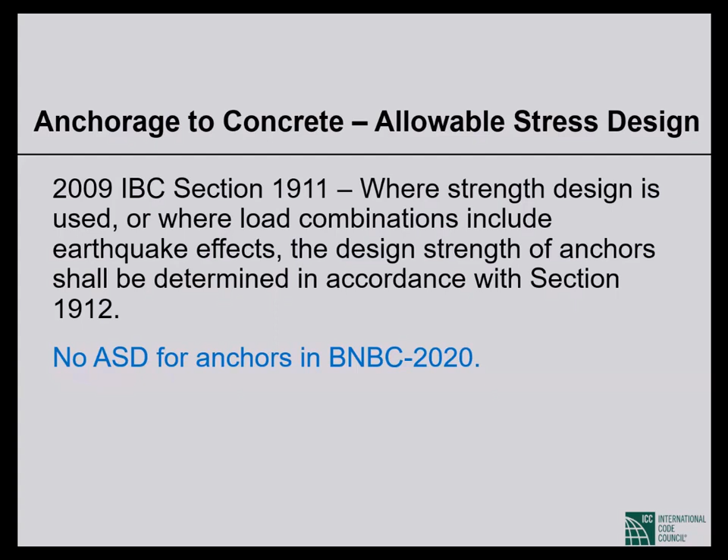IBC was saying when you were doing strength design for your structure that included the anchors, or when the anchors were subjected to earthquake forces, you had to do strength design. Now, I wrote in blue letters, and whenever you see blue on the slides, it relates to BNBC 2020, that there is no allowable stress design of anchors in BNBC 2020. All you have is strength design of anchors in Appendix K, as in king.

The other thing that I thought I should mention: 2009 IBC said the provisions of this section 1912 shall govern the strength design of anchors installed in concrete for purposes of transmitting structural loads from one connected element to the other. Headed bolts, headed studs, and hooked bolts, which can be J or L bolts, cast in concrete, and expansion anchors and undercut anchors installed in hardened concrete shall be designed in accordance with Appendix D of ACI 318 as modified by Section 1908.1.9, etc.

So the IBC was sending the user to Appendix D of ACI 318, where the anchor design provisions were. And the other thing is that IBC itself made a couple of modifications to Appendix D. Now, you don't have any of that. No comparable provision in BNBC 2020.

There is nothing in the code itself that directs you to Appendix K for anchor design, except for something that Dr. Akib found for me, section 6.8.8.3. So Appendix K itself is in Part 2, Chapter 6 of BNBC. This section is also part of Part 2, Chapter 6, and it says in precast construction, anchor bolts or suitable mechanical connectors shall be permitted for satisfying such and such section. Anchor bolts shall be designed in accordance with Appendix K. But this section is only for precast concrete.

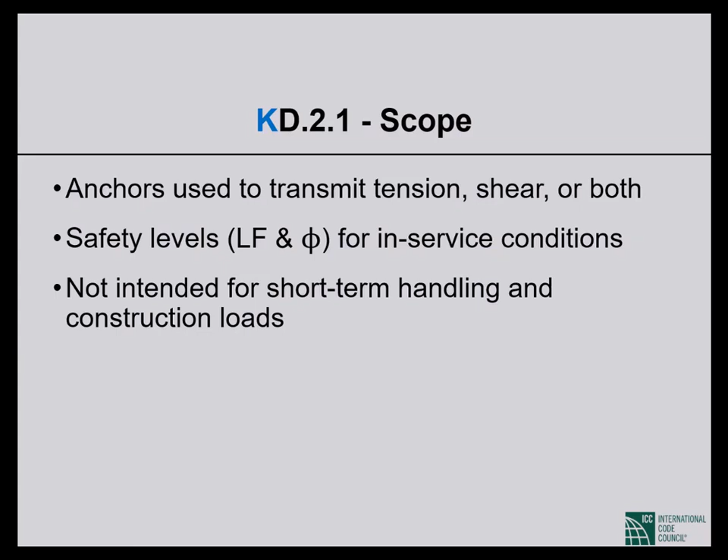The load factors and strength reduction factors used in Appendix K consider in-service conditions of the structure. The appendix is not intended for use for short-term loading and for construction loads. This is very important. Construction loads are not included in the scope of Appendix K, neither are short-term handling loads. If you have to install anchors to transmit construction loads, you have to go beyond Appendix K to do that.

The appendix has provisions for cast-in-place anchors and also post-installed mechanical anchors.

Excluded from the scope of the appendix are specialty inserts of various kinds, through bolts that go through the body of concrete, and multiple anchors connected to a single plate at the embedded end of the anchors. This is a pretty popular item when groups of anchors are not working out; people try this to enhance the capacity of the group. However, the problem is the concrete at the interface of the plate, the concrete just above the plate, is of poorer quality. We know that, but we do not have a handle on how much poorer the quality of that concrete is.

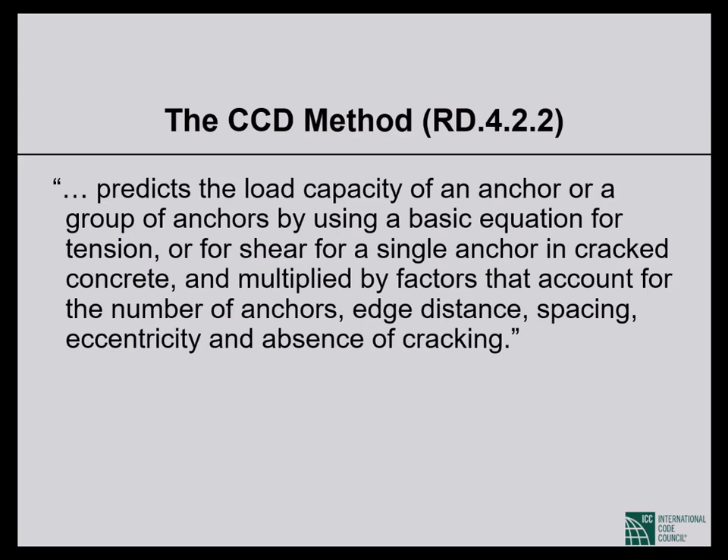The concrete capacity design method predicts the load capacity of an anchor or a group of anchors by using a basic equation for tension and a basic equation for shear. Each equation is for a single anchor in cracked concrete, which is multiplied by factors that account for the number of anchors, edge distance, spacing, eccentricity, and absence of cracking.

Before the concrete capacity design method, we used to use intersecting cones. The idea was when an anchor subject to tension pulls out of the concrete, it typically takes a chunk of concrete with it. We postulated back then that the chunk of concrete that comes out with the anchor is in the shape of a cone and that the failure angle is 45 degrees. If you had a group of anchors, you had to deal with intersecting cones, which was a pain. Anybody who has done anchor design by the old method would readily agree with me that it was pretty painful.

The concrete capacity design method has replaced the 45-degree failure cone with a truncated pyramid. Now the postulation is that when a group of anchors in tension comes out of the concrete, the chunk of concrete it takes with it is in the shape of a truncated pyramid, and the failure angle is 35 degrees rather than 45 degrees. These are the basic differences between the concrete capacity design method and the 45-degree failure cone method we used to use: a truncated pyramid with a 35-degree failure angle.

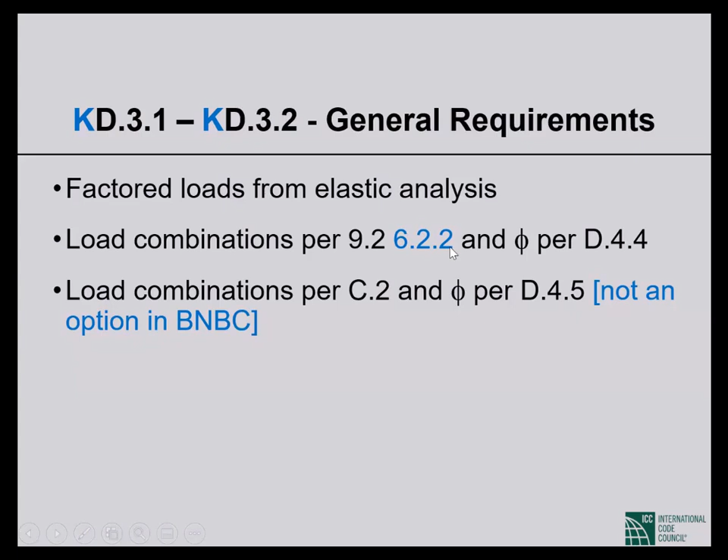Load combinations: in ACI 318 Appendix D, there was a choice of using load combinations in Appendix C rather than load combinations in Chapter 9. Those are traditional ACI load combinations that we need not worry about. There was a set of phi factors to go with those other load combinations. None of that is in BNBC 2020. So your only choice is load combinations from section 6.2.2 and the phi factors to go with those load combinations, given in section D.4.4.

Now, the K.3.3 section I mentioned, seismic applications: if you have an anchor that is part of a structure assigned to seismic design category C, D, E, or F, the requirements that apply to that anchor include that anchors in plastic hinge zones of structural members are outside of the scope of Appendix K.

So for a seismic application, if you want to put an anchor bolt at the end of a beam, near its column support, that anchor is excluded because there will be plastic hinging at that beam end. Cracking itself is a big enough problem. When it is plastic hinging, meaning extensive cracking and possible yielding of reinforcement, we know very little as to how our anchor may be affected. So ACI 318 has said this is outside the scope of Appendix D. That does not mean you cannot do it, but if you want to put an anchor in the plastic hinge region of a member, you are on your own — Appendix D or Appendix K does not help you. It is outside of scope.

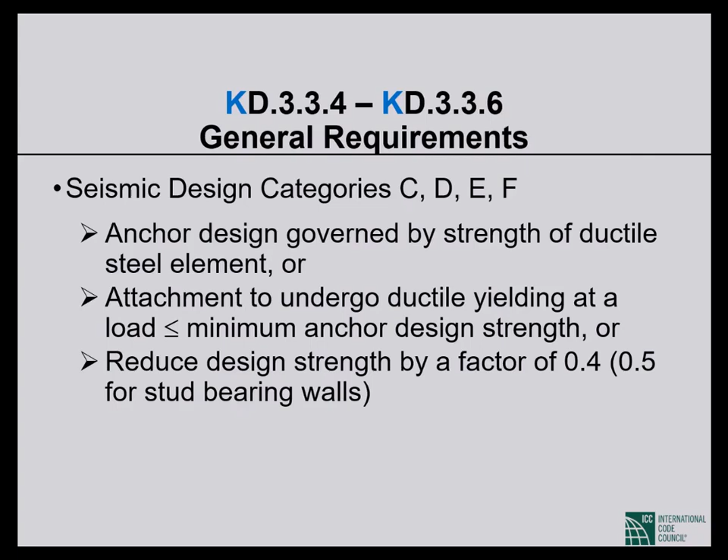Now we talked about ductile anchor failure. What is a ductile steel element? What is a brittle steel element? These are defined in BNBC, chapter 6.

The definition is that when you pull on an anchor, just like you pull on a reinforcing bar in a tensile test, if the elongation, typically measured over a 2-inch gauge length, is less than 14%, or the reduction in area—as you pull on the anchor, there is eventually necking, the area reduces before there is a rupture—if the reduction in area is less than 30%, or both, then you have a brittle steel element. If the elongation is larger than or equal to 14% and the reduction in area is larger than or equal to 30%, you have a ductile steel element.

A steel element meeting the requirements of ASTM A307, which are very common, shall be considered ductile. So the anchors we typically use are ductile, but there are brittle anchors as well.

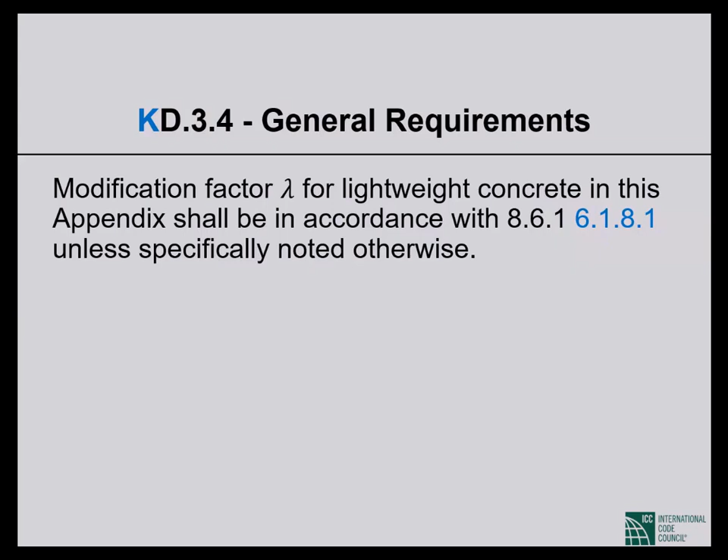The modification factor lambda for lightweight concrete comes from the main body of chapter 6, and the section number is given. Now, as in the design of any structural element, the design axial strength of the anchor has to be larger than or equal to the required axial strength, and the design shear strength of the anchor has to be larger than or equal to the required shear strength.

Now, for an anchor subject to tension, we consider multiple failure modes, and the lowest of the strengths corresponding to the multiple failure modes is the nominal axial strength N sub n, which has to be reduced by a proper factor. Similarly, for an anchor subject to shear, we also consider multiple failure modes. Whichever failure mode gives us the lowest design strength is the one that governs, and that lowest design strength still has to be larger than or equal to the required strength. And if an anchor is subject simultaneously to tension and shear, then the interaction between shear and tension has to be considered.

From this point on, I will introduce a numerical example and introduce the code provisions as we work out the example. I think it makes a lot more sense that way—the requirements become much more understandable. Without numbers, these things are too abstract to be absorbed.

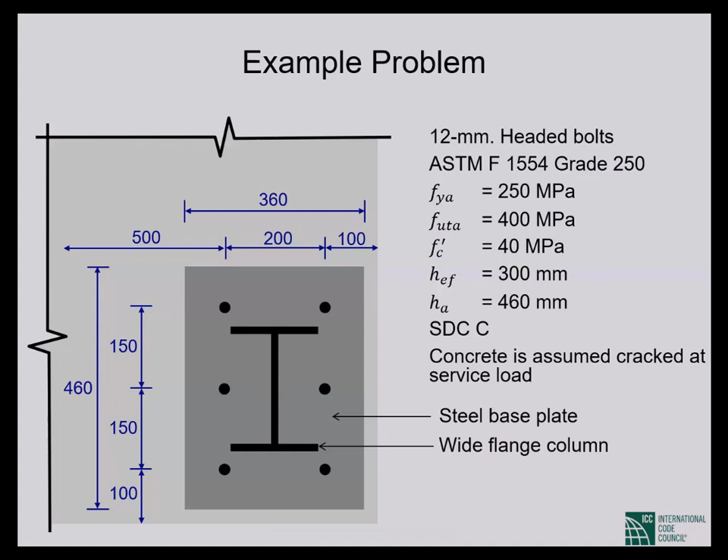Concrete is assumed cracked at service loads. So we have 6 anchors, the spacing one way is 200, the spacing the other way is 150 millimeters. Edge distance here is 100, edge distance here is 100. In the other two directions, we have plenty of concrete. This way, when we need an edge distance, we have taken it in the calculations as 500 millimeters—that's just something used for calculation purposes.

First, we consider this group of anchors subject to tension, which is applied at an eccentricity of 25 millimeters with respect to both the x-axis and the y-axis as seen in the picture, the centroidal axis. So 25 millimeter eccentricity both ways.

The failure modes that Appendix K considers in tension: the steel itself failing, concrete breakout failure, pull-out failure, and concrete side face blowout, which happens to headed anchors that are close to an edge with thin cover. So side face blowout happens when we have headed anchors that are reasonably deep and close to an edge, where the cover is relatively thin. It can happen in those situations.

So we have a group of anchors subject to tension that is eccentric with respect to both axes. First, we check for possible compression in any of the anchors in the group, because compression anchors have to be excluded. We include in our calculation only the tension anchors. So we are looking at the x eccentricity. We have an axial tension applied at an eccentricity of 25 millimeters. That tension is equivalent to a tension along the centroidal axis plus a moment, which equals the tension multiplied by the eccentricity, the tension times 25 millimeters. The concentric load will be divided equally between the 6 anchors, so each anchor gets 1/6 of the applied tension.

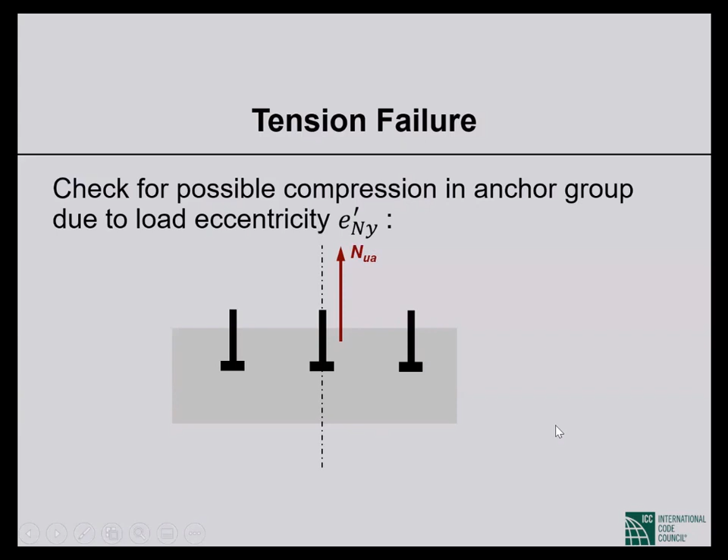The other eccentricity, the y eccentricity, let me put everything on the screen. That also causes the same moment, the axial load times the eccentricity. So that tension is equivalent to tension along the centroidal axis plus the moment. The tension along the centroidal axis is divided equally by the 6 anchors, and the moment causes additional tension on those 2 anchors and additional compression on those 2 anchors. The distance now is 300, so we divide the moment by 300, and now there are 2 anchors here, 2 anchors here, 2 anchors here, divided by 2. So this anchor gets a tension of 5/24 of the applied tension, and this anchor gets a tension of 1/8 of the applied tension. There is no compression here. This could go into compression, but that did not happen.

Either due to the x eccentricity or the y eccentricity, so the maximum tension on an anchor, considering both eccentricities, comes out to 1/4 of the applied tension, and the minimum tension comes out to 1/12 of the applied tension, with no compression. So we have checked and made sure that none of the anchors in the group is subject to net compression. We are okay, we don't have to exclude any of the anchors.

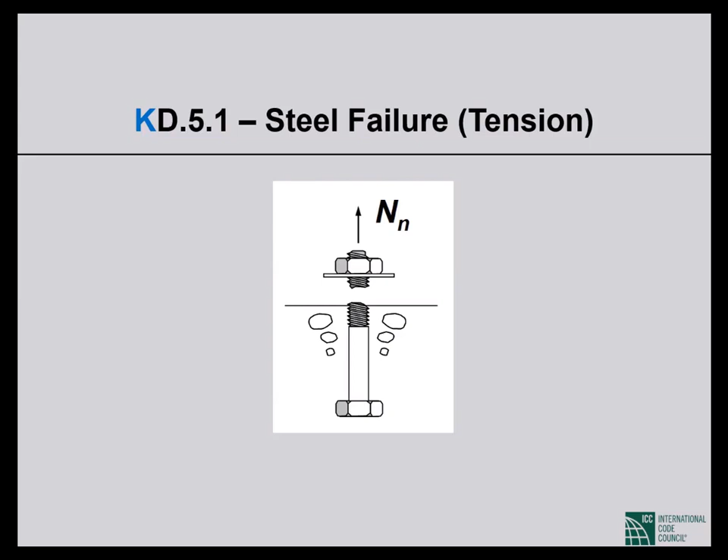So we have 4 failure modes. The first one is the anchor itself failing, just like a reinforcing bar fails under tension. If that is our failure mode, the corresponding nominal strength is the number of anchors in the group times the effective area of the anchor in tension. This is the area of the anchor excluding the threads, times the ultimate tensile strength. The ultimate tensile strength of the anchor, in our case I think it was 400 megapascal, has to be less than or equal to 1.9 times the yield strength of the anchor, which is 250 MPa, and it also has to be smaller than 860 MPa.

The effective area can be calculated using this formula, but there are design aids available, at least in the US, or I suppose your anchor manufacturer will give you that effective area number.

In our case, for the 12-millimeter diameter anchors, the effective area is 79.35 square millimeters. The ultimate tensile strength is 400 MPa, which is less than 1.9 times 250, that is 475, and it's also less than 860 MPa. So we satisfy the requirements that are imposed.

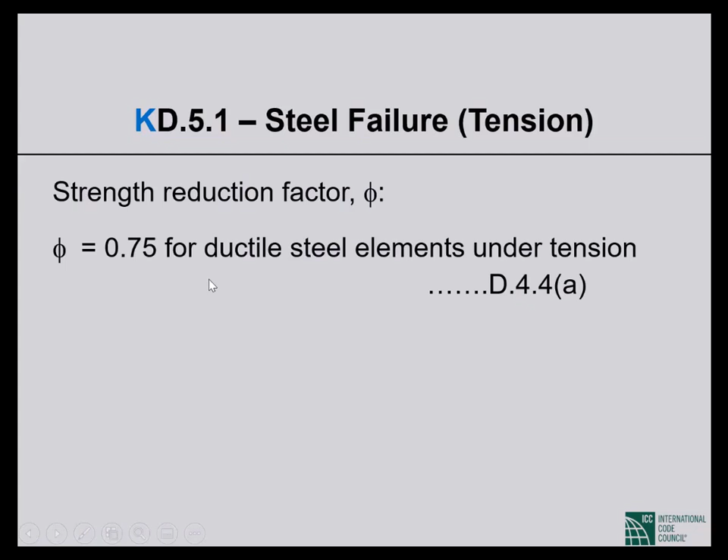The strength reduction factor, if you go to D.4.4, is 0.75 for ductile steel elements under tension. Since this is steel failure, we don't apply an additional 0.75 reduction. So the 31.74 kilonewtons of nominal tensile strength is reduced to 23.81 kilonewtons of design tension strength, phi times N sub SA. This is still for a single anchor.

Now, remember the maximum tension that any anchor in the group of 6 was subject to is 1/4 of the tension applied to the group. So if a single anchor can carry 23.81 kilonewtons, then the group can carry 23.81 multiplied by 4, or 95.24 kilonewtons.

Okay, so please follow this closely, this is important. A single anchor has a design strength of 23.81 kilonewtons. That is the maximum demand that can be put on a single anchor.

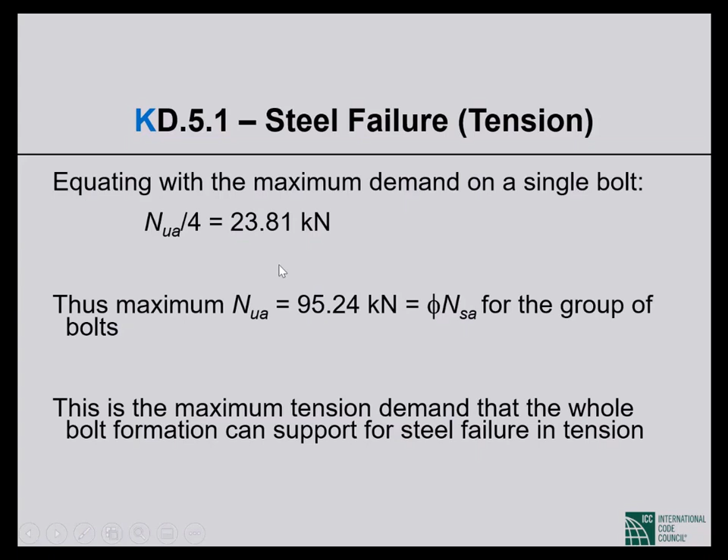Now, the anchor in the group that sees the highest tension experiences 1/4 of the tension applied to the group. So if a single anchor can be subject to 23.81 kilonewtons, the group can be subject to a design tension strength of 4 times 23.81, which is 95.24. This is the maximum tension demand that the whole bolt formation can support for steel failure in tension, 95.24 kilonewtons.

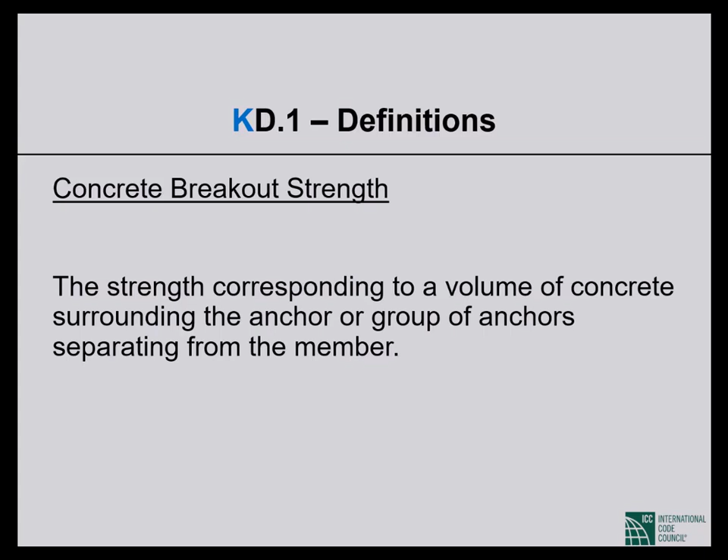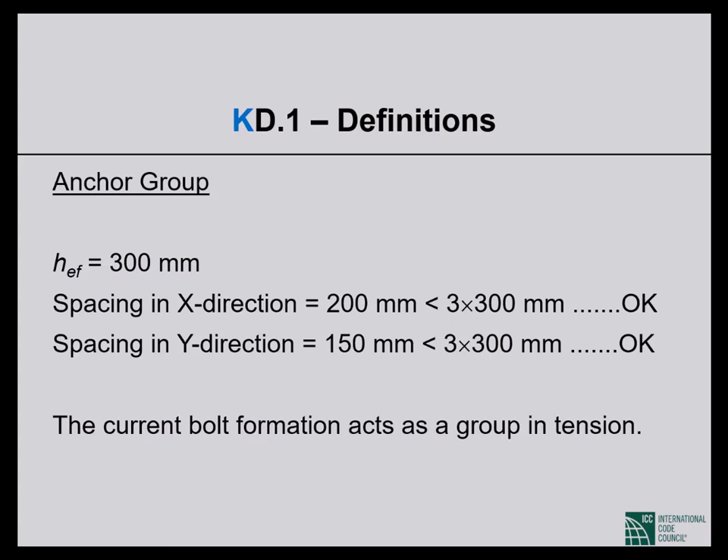So a group is defined by a spacing less than 3 times the embedment depth. Now we have 6 anchors, so we have 4 possibilities: 6 isolated anchors, 2 groups of 3, 3 groups of 2, or a group of 6, depending on the spacing in each direction. In the X direction, the spacing is 200 millimeters, less than 3 times the effective depth of 300 millimeters. In the Y direction, the spacing is 150 millimeters, less than 3 times the effective depth of 300 millimeters. So both ways the spacings are close, meaning we have a group of 6 anchors, not 6 isolated anchors, nor 3 groups of 2 or 2 groups of 3.

Now another complication: where 3 or more edge distances for an anchor subject to tension are less than 1.5 times the embedment depth, we have to use a reduced effective embedment depth in breakout strength computations. That reduced depth shall be equal to the larger of the maximum edge distance divided by 1.5, or the maximum spacing between anchors divided by 3.

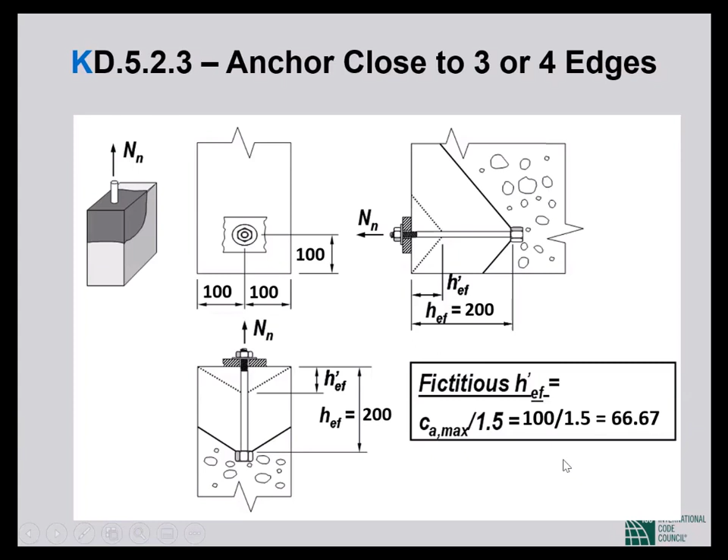Let's look at an example. We have an anchor with edge distances of 100 millimeters in three directions. The effective depth is 200 millimeters, and 1.5 times that is 300 millimeters. So each edge distance is short - the anchor is close to 3 edges. We must calculate using a reduced effective embedment depth, equal to the largest edge distance, 100 millimeters, divided by 1.5, which is 66 2/3 millimeters. So instead of the actual 200 millimeters, we use 66 2/3 millimeters for breakout strength calculations. This is a single anchor, so there is no question of spacing.

In the example problem, checking the number of edge distances less than 1.5 times the embedment depth: we have an embedment depth of 300 millimeters, so 1.5 times that is 450 millimeters. We have 2 edge distances of 100 millimeters, so our anchor group is close to 2 edges, not 3 or more. So we do not have to modify our embedment depth of 300 millimeters.

Now let's discuss A sub n0 and A sub n, starting with A sub n0. We have an anchor subject to tension, shown here in elevation and in plan. If the failure angle is 35 degrees, then this distance is 1.5 times embedment depth, the same into and out of the screen, and that distance is also 1.5 embedment depth. So that's the projected area of the failure surface of a single anchor in tension, considering edge distance.

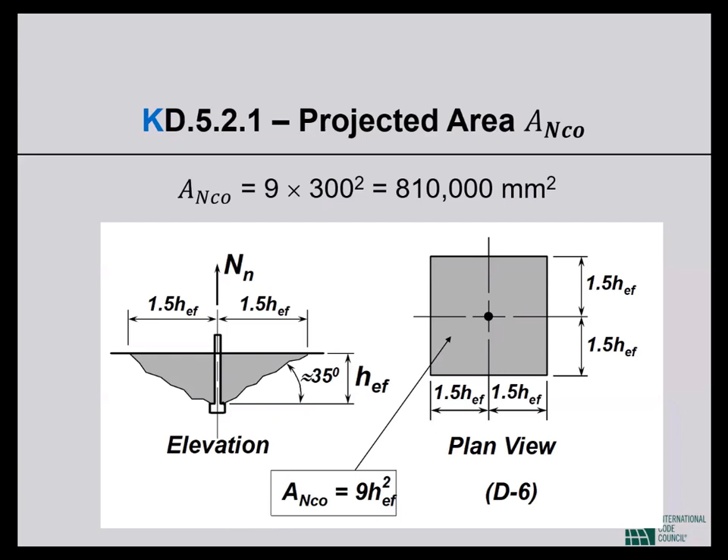A sub n is the projected area of the failure surface by a group of anchors in tension, considering spacing and edge distance. In this example, we have a group of 4 anchors. The edge distance this way is C sub 1, and the other way we have a large edge distance, but we cannot go any more than 1.5 times the effective depth.

A 35 degree failure cone means that this distance is 1.5 times embedment depth. If we have an edge distance shorter than 1.5 embedment depth, we have to go with the shorter edge distance. Spacing this way is S sub 1, and the other way the spacing is S sub 2. This edge distance is 1.5 embedment depth because we have plenty of concrete this way, but this edge distance is C sub 2. For an anchor or anchor group subject to tension, C sub 1 is the shorter edge distance, C sub 2 is the larger edge distance. This is how our notation is.

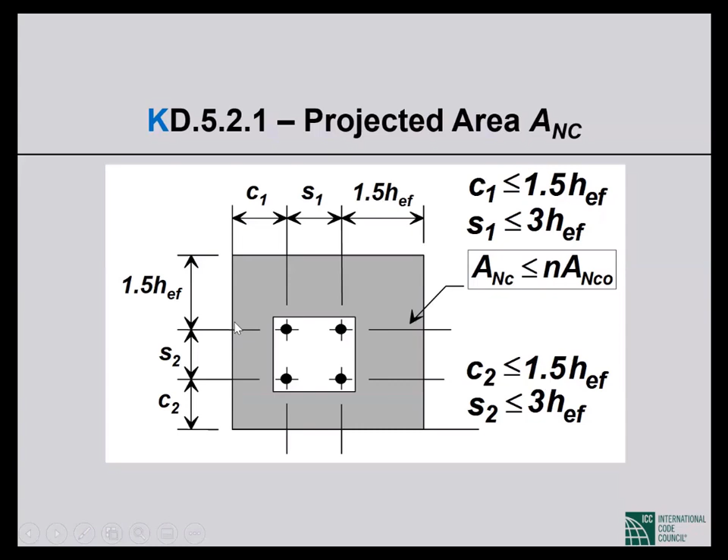In our case, we have a group of 6 anchors. These distances we know: 150, 150, edge distance 100. This way the edge distance would be 1.5 times our embedment depth, which is 450 millimeters, because we have plenty of concrete this way. Along the x direction, edge distance of 100, spacing of 200, we have plenty of concrete to the left, so we take 1.5 times the embedment depth, which is 450 millimeters. So our A sub n is 450 plus 200 plus 100, multiplied by 100 plus 2 times 150 plus 450.

That gives us 637,500 square millimeters. A sub n cannot be any larger than n times A sub n0, and we satisfy that requirement.

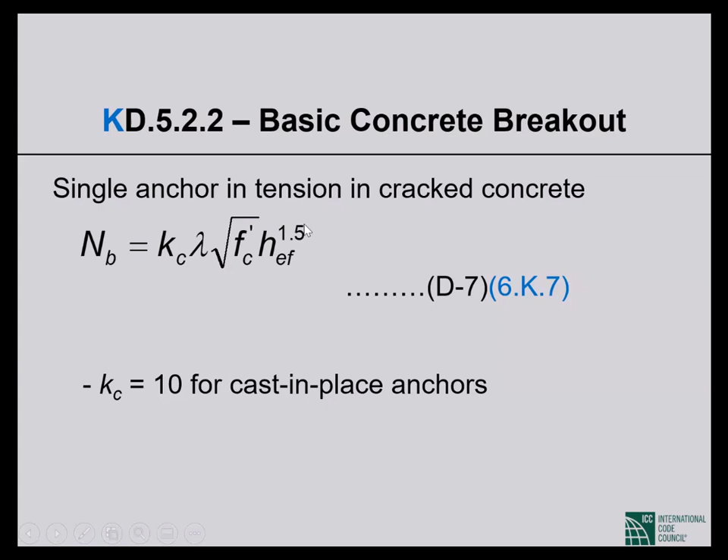The basic breakout strength is given by this expression, where K sub C is 10 for cast-in-place anchors. Notice the embedment depth is raised to the power 1.5. There is an alternative equation where we can increase the power from 1.5 to 5/3, but the constant goes down from 10 to 3.9. If the embedment depth is between 280 and 635 millimeters, we have this alternative equation, and whichever equation gives us the larger value, we are free to use.

By the first equation, the basic breakout strength comes out to 328.6 kilonewtons. By the second equation, which is applicable in our case because our embedment depth of 300 millimeters is between 280 and 635, we get a breakout strength of 338 kilonewtons. We are free to use the larger of the two, so our breakout strength is 338 kilonewtons.

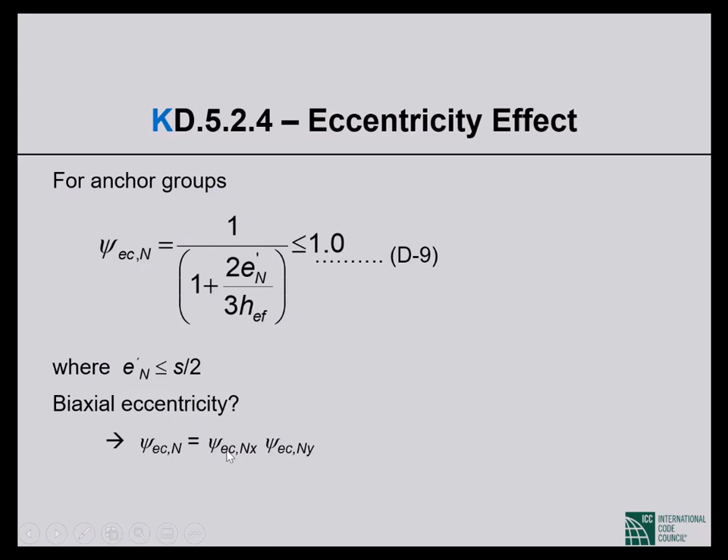Eccentricity factor: we have an eccentricity of 25 millimeters each way. This is the expression for the correction factor, which cannot be any larger than 1. When we have biaxial eccentricity, we calculate 2 correction factors for the 2 eccentricities and take the product of the two as our eccentricity correction factor. The eccentricity is shown in this picture.

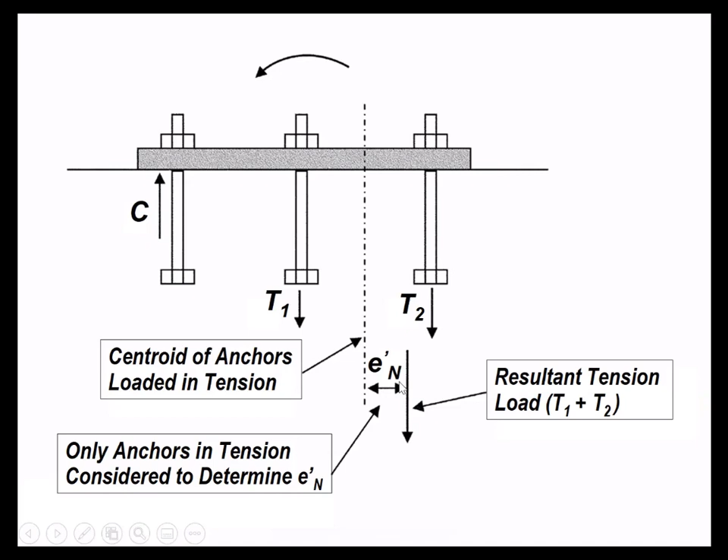We have 3 anchors subject to tension in this group; it could be 6 or 9 anchors, whatever. This is the resultant tension, and this is the centroidal axis of the anchor group, giving us the eccentricity. In this group of anchors, the left-hand anchors are subject to compression, so they don't count. So now the resultant tension acts along this axis, and the centroidal axis of the anchors subject to tension is here. This is the eccentricity that will have to be used in calculating our eccentricity correction factor.

In our case, embedment depth of 300 millimeters, eccentricities of 25 millimeters each. If we plug in the numbers into the expression for the correction factor, we get 0.95 correction factor for each eccentricity. When we multiply the two, we have a correction factor for both eccentricities, which is 0.9 — a 10% reduction in strength because of the eccentricities.

The edge distance correction factor: if minimum edge distance is larger than or equal to 1.5 times the embedment depth, we have no correction for edge distance. If, however, the minimum edge distance is less than 1.5 embedment depth, then our correction factor is 0.7 plus 0.3 times the minimum edge distance divided by 1.5 times the embedment depth.

So we have effective depth of 300 millimeters, minimum edge distance of 100 millimeters, which is less than 1.5 times the embedment depth. So our correction factor is 0.7 plus 0.3 times the minimum edge distance of 100 divided by 1.5 times the embedment depth, which is 0.77. Because the anchor group is so close to the edge, 100 millimeters as opposed to 1.5 embedment depth, which is 450 millimeters, we lose 23% of strength. That's what it means.

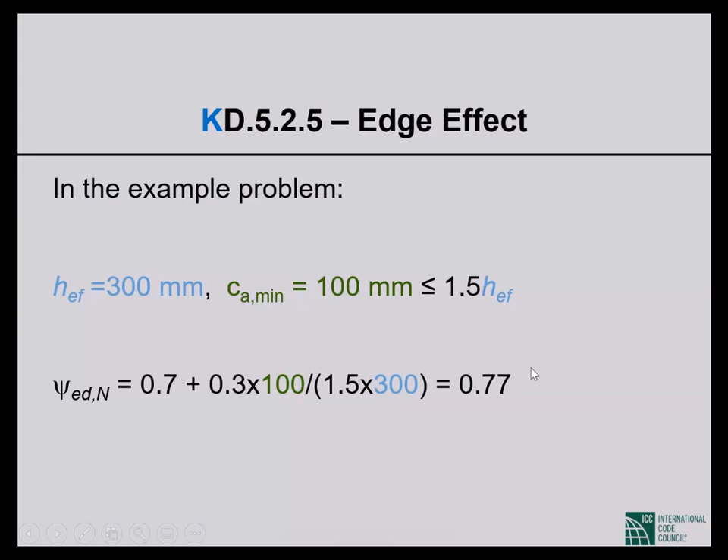Cracking effect for uncracked concrete means the tensile strength under service load is less than the modulus of rupture, giving a correction factor of 1.25. If we have cracked concrete, where the tensile stress under service loads is larger than or equal to the modulus of rupture, the correction factor is 1.0. Our concrete is cracked under service level loads, as stated in the problem statement, so our correction factor for cracking is 1.0.

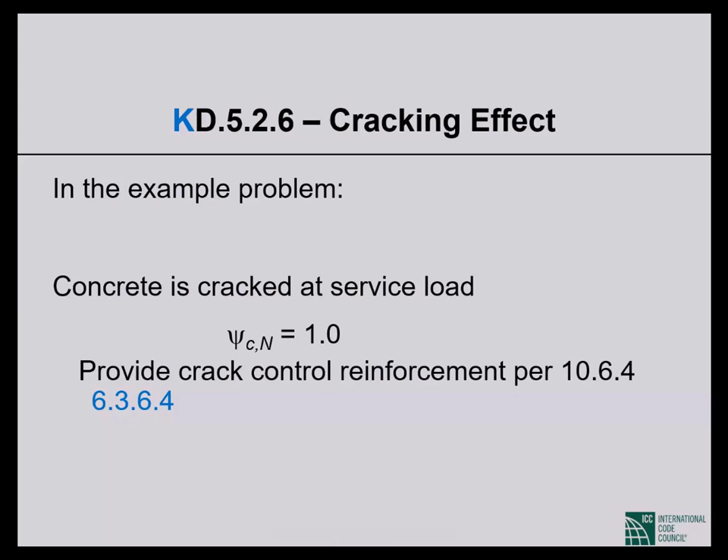Okay, now we can calculate our breakout strength for the group of 6. A sub Nc we calculated as 637,500. The A sub Nco is 810,000.

Eccentricity correction 0.9, edge distance correction 0.77. The correction for possible absence of cracking is 1. We have cast-in-place anchors, so the post-install anchor correction is 1.0. Basic breakout strength is 338 kilonewtons. So we have a group breakout strength of 184.35 kilonewtons.

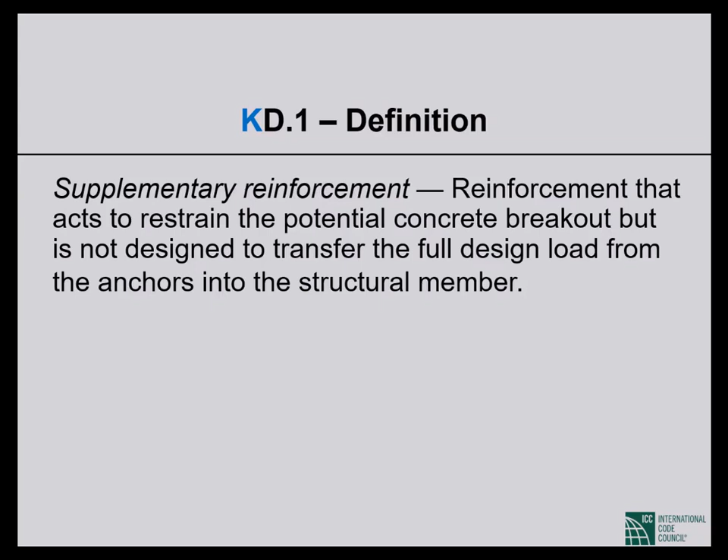Phi factor: in this case of breakout in tension, there are two conditions. Condition A applies for concrete breakout and side face blowout when supplementary reinforcement is present. If there is no supplementary reinforcement, then for concrete breakout and side face blowout, and irrespective of supplementary reinforcement when considering concrete pullout, it is Condition B, which gives a lower phi factor. Supplementary reinforcement is reinforcement that acts to restrain potential concrete breakout but is not designed to transfer the full design load from the anchors into the structural member. So it restrains potential concrete breakout but does not suppress it. That's supplementary reinforcement, as opposed to anchor reinforcement, which is specifically designed to transfer loads from the anchors into the structural member. Stirrups, as used for shear reinforcement, may fall into this category and act as supplementary reinforcement.

In our case, we have taken a phi of 0.75, assuming Condition A, meaning we have supplementary reinforcement. For seismic design category C, we have an additional reduction factor of 0.75. So we reduce our nominal breakout strength by 0.75 multiplied by another 0.75, which is a reduction of 44%. Our combined reduction factor is 0.56. So 0.56 times the nominal concrete breakout strength for the group of 6 is 103.24 kilonewtons.

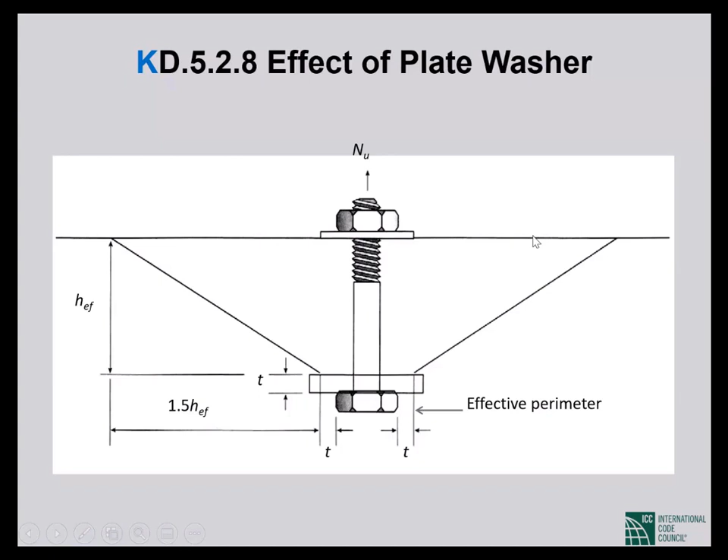If you have a plate washer on your anchor bolt, which some people use to enhance breakout strength, the advantage is that without the washer, your failure planes start from here and there. With the washer, your failure plane starts from a point where the distance from the edge of the head to where you draw the failure plane equals the thickness of the washer. This may give you a somewhat larger projected area of the failure plane. That's the advantage of a washer—it's typically not all that substantial, but every little bit helps.

The concept of anchor reinforcement.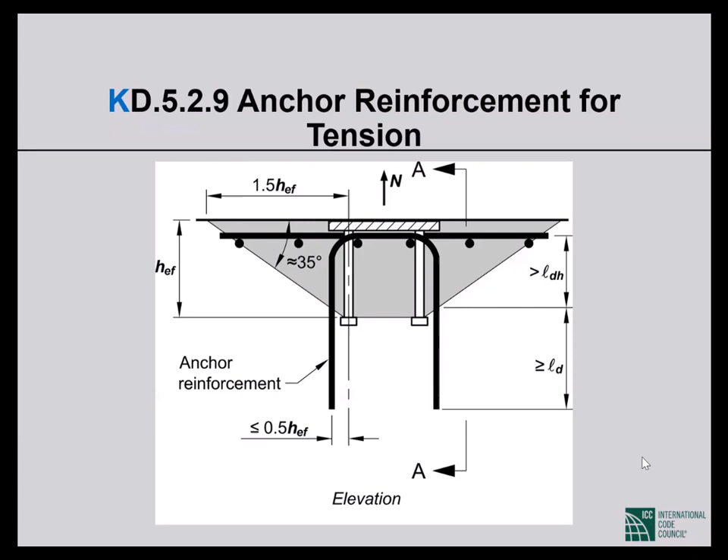We didn't run any numbers with anchor reinforcement, but I did want to show you the very powerful concept of anchor reinforcement. The last tensile failure mode is pullout.

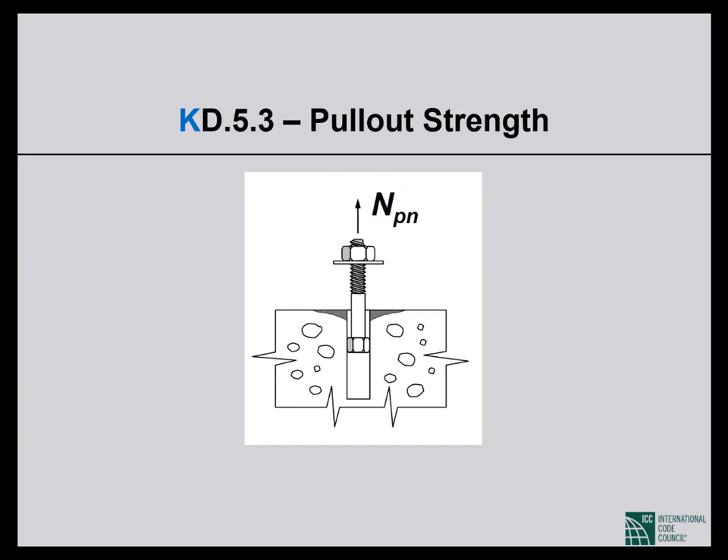That is the anchor pulling out clean, no chunk of concrete coming with the anchor. That does not happen to headed bolts or studs typically. It does happen to hooked bolts because the hooks, under large tension, can straighten out, and then the anchor just pulls out.

The pull-out strength, nominal pull-out strength, is a basic pull-out strength multiplied by a factor, psi sub C for concrete, P for pull-out. If it is a headed stud or bolt, the basic pull-out strength is 8 times the bearing area of the head of the anchor multiplied by F sub C prime.

So I want you to ponder this. So far, everything was square root of f sub c prime because we were talking about tension. Here, this is compression, 8 times f sub c prime. So the anchor is bearing on the concrete, the anchor head is bearing on the concrete, and it will take that much force to have the anchor pull out of the concrete: 8 times f sub c prime times the bearing area.

If it is a J bolt or an L bolt, the bearing area is e sub h times d sub a, the anchor diameter. I think I have a picture, so this would be e sub h. So bearing area would be e sub h times the diameter of the bolt. If it is a headed anchor, then the bearing area is the shaded area in the picture. If it is a headed bolt or stud, then the bearing area is multiplied by 8 times f sub c prime. That is the basic pull-out strength.

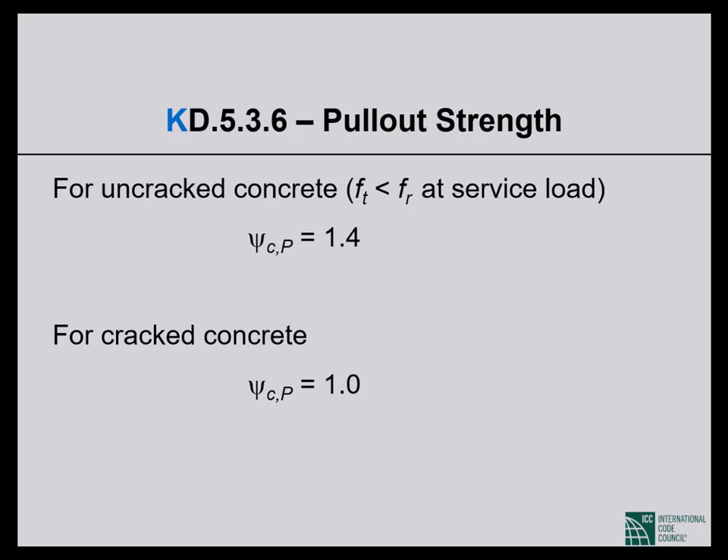For uncracked concrete, psi sub C,P is 1.4. For cracked concrete, psi sub C,P is 1.0.

So coming to our example problem, 12 millimeter cast in place headed bolts with hexagonal head, that's what we have. Bearing area, this the manufacturer will give you, is 187.74 square millimeters. So basic pull-out strength is 8 times F sub C prime of 40 MPa times the bearing area, that is 60 kilonewtons.

For concrete cracked under service load, which is what we have, the correction factor is 1.0. So we have a pull-out strength for a single anchor of 60 kilonewtons. This is for a single anchor.

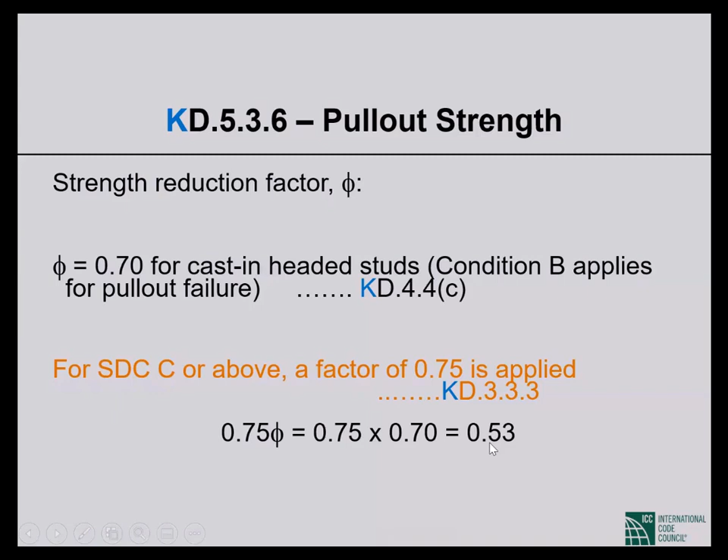The phi factor for pull-out strength, this is condition B automatically, is 0.7. We have a 0.75 reduction because this is design category C. So our total reduction is 53%, 0.53. So the calculated 60 kilonewtons goes down to 31.8 kilonewtons of design pull-out strength of a single anchor.

Now remember, in our group of 6 anchors, the anchor that is subject to the largest tension is subject to 1/4 of the tension that is applied to the group. So if a single anchor can carry 31.8 kilonewtons, the group can carry 4 times 31.8, or 127.2 kilonewtons, before the group pulls out. So the group pull-out strength is 127. This is the maximum tension demand that the whole bolt formation can support for pull-out failure in tension.

Final failure mode, side face blowout. This is not an easy one. So the picture tells you the whole story. These are headed bolts or studs, fairly deep embedment.

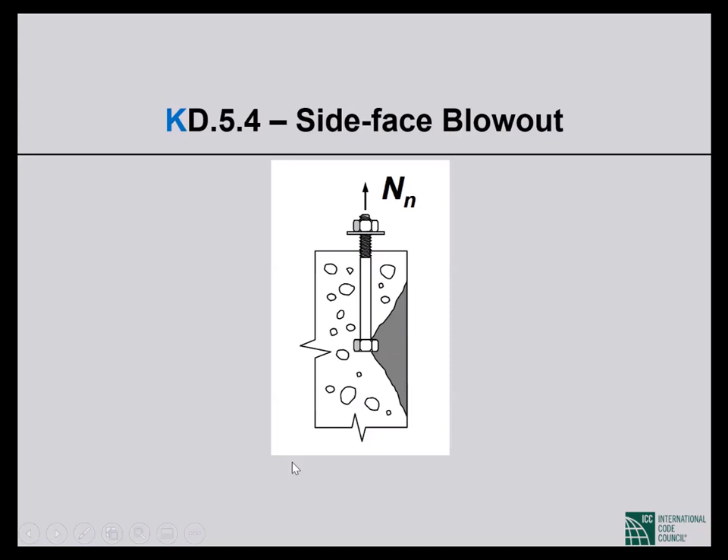Close to the side face, the cover is thin. So this is the definition: the strength of anchors with deep embedment but thin side cover corresponding to concrete spalling on the side face around the embedded head, while no major breakout occurs near the top concrete surface. Okay, the picture said it all.

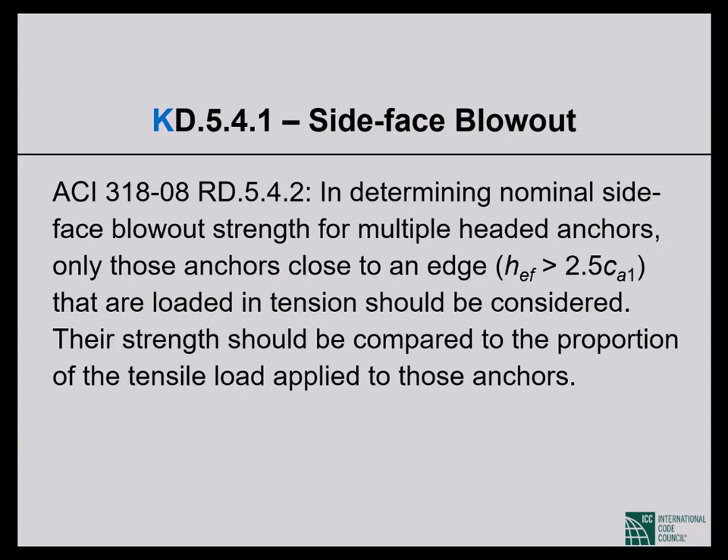In determining nominal side face blowout strength for multiple headed anchors, only those anchors close to an edge are considered, and close means the shorter edge distance, C sub A1, will be smaller than 40% of the embedment depth. That's what close means. Only those anchors close to an edge that are loaded in tension should be considered. Their strength should be compared to the proportion of the tensile load applied to those anchors. You will see, we have numbers.

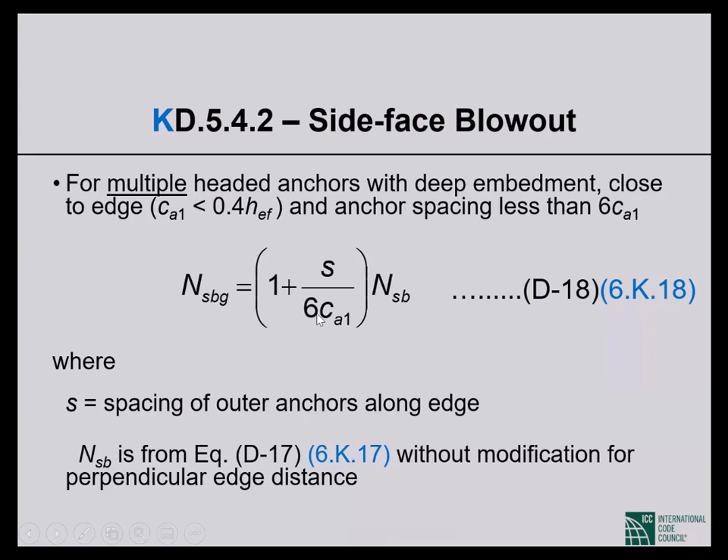Now that was for a single anchor, single-headed anchor with deep embedment. For multiple-headed anchors with deep embedment close to edge, and anchor spacing less than 6 times the shorter edge distance, the group strength is the single anchor strength multiplied by this expression. This is the spacing between anchors, and C sub A1, you know. S is the spacing of outer anchors along the edge. These outer anchors is very significant, as you will see when I show you the numbers.

So in our example problem, anchors used are headed bolts. Minimum edge distance we have is 100 millimeters, which is less than 40% of 300 millimeters, which is 120 millimeters. So in the X direction, we have an edge distance shorter than 40% of the embedment depth. In the Y direction, we also have an edge distance shorter than 40% of the embedment depth. So we have side face blowout failure possible in both X and Y directions. The blowout strength needs to be calculated in both directions, and the smaller strength would govern.

This is very important. Okay, so this is our anchor group. We are first considering side face blowout of those 3 anchors to the right. So these are the bolts under consideration. C sub A1 is 100 millimeters. Anchor spacing is 150 millimeters. This 150 millimeters is less than 6 times the edge distance, so that condition is satisfied.

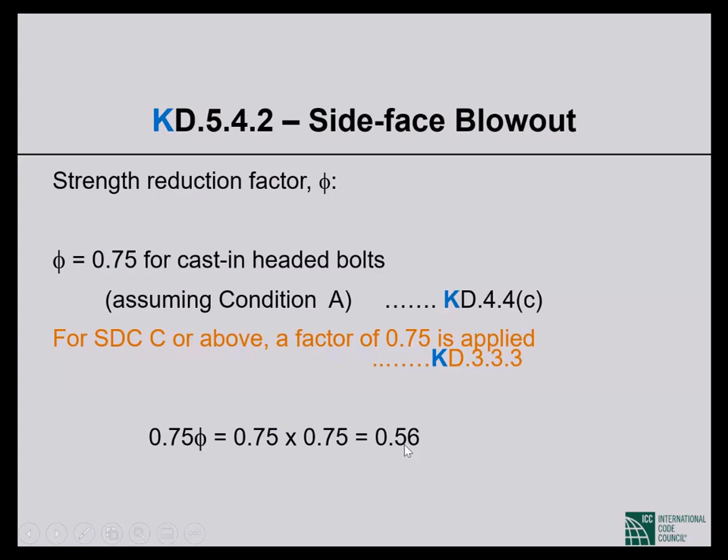And this is the nominal strength. The phi factor, assuming condition A, that we have supplementary reinforcement, is 0.75. And we have an additional 0.75 because we have design category C application. So the combined reduction factor is 0.56. So our 169 kilonewtons of side face blowout strength goes down to 94.64 kilonewtons.

Now this group of 3 bolts to the right is subject to 5/8 of the tension applied to the group. This is very easy to follow, and we have gone through that at the beginning. So if the 3 anchors to the right can carry 94.64 kilonewtons, the group will be able to carry 8/5 of that, which is 151.42 kilonewtons. That is the side face blowout strength of the group, the maximum tension demand that the whole bolt formation can support in side face blowout. That is very precise language that we used here.

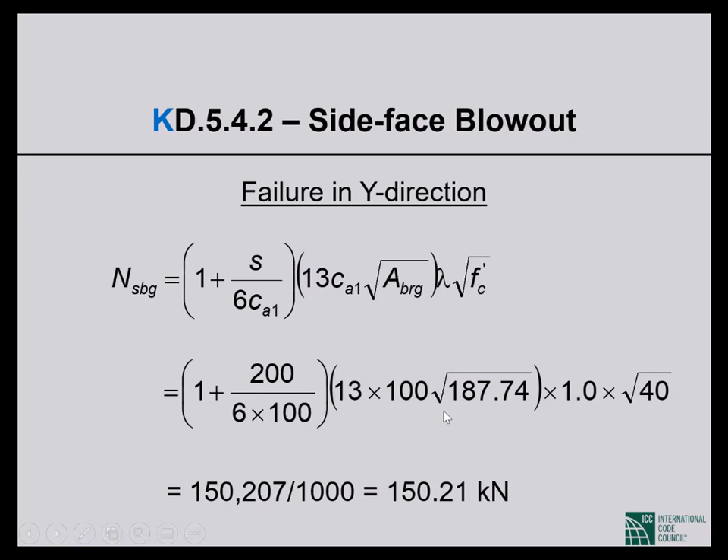So we are considering the side face blowout of the 2 anchors to the bottom. Minimum edge distance 100 millimeters, anchor spacing 200 millimeters, which is less than 6 times 100, so that condition is met. The spacing of outer anchors in the group, in this case there are only 2 anchors, so the spacing is 200 millimeters. Bearing area remains unchanged, and F sub C prime remains unchanged. So the breakout strength of the group of 2, if you plug in the numbers we know by now, is 150.21 kilonewtons. The phi and 0.75 for design category C brings the 150.21 down to 84.12 kilonewtons. The group of 2 anchors is subject to a maximum tension of 5/12 of the tension applied to the group. So the maximum tension demand that the whole bolt formation can support in side face blowout is 12/5 of the 84.12, which is 202 kilonewtons.

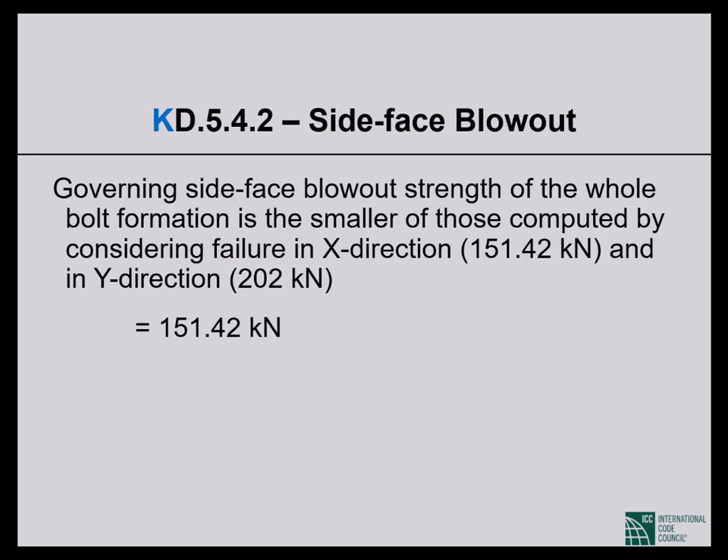So the governing side face blowout strength of the whole bolt formation is the smaller of those computed by considering failure in the X direction, the 3 bolts to the right, which was 151.42 kilonewtons, and the 2 anchors to the bottom, the Y direction blowout, which gave us 202 kilonewtons. The smaller one, corresponding to the 3 bolts to the right breaking out, is 151.42.

So finally we come to the bottom line. We have a steel failure strength of 95.24 kilonewtons. We calculated all these numbers. Concrete breakout strength 103.24. Pullout strength 127.2. Concrete side face blowout, we just calculated, 151.42. So the group strength in tension is the smallest of the four, which is 95.24 kilonewtons, and it is governed by steel strength. So this group of anchors is suitable for application in buildings assigned to design category C or higher. Remember, design category C and higher, we cannot have concrete failure mode. So just to calculate the tensile strength of the group of 6 anchors, you saw the amount of trouble we had to go through.

Shear is still to come.

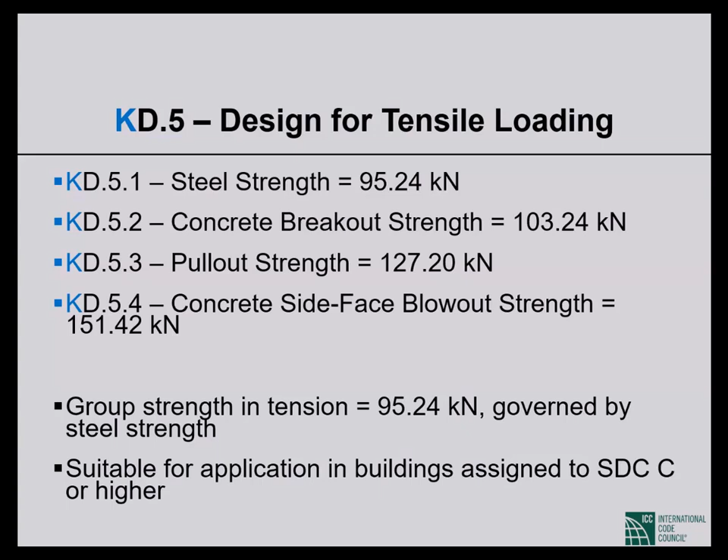Okay, with that, I will go to the shear part of the presentation. In tension, we had 4 failure modes. Now we have 3 failure modes: the anchor itself failing in shear, concrete breakout strength similar to breakout in tension, and concrete pry out strength. We don't have side face blowout or pull out, but this pry out is like side face blowout. If we have a shallow anchor subject to shear, it may kick out and damage the thin concrete at the top. I'll show you a picture when the time comes.

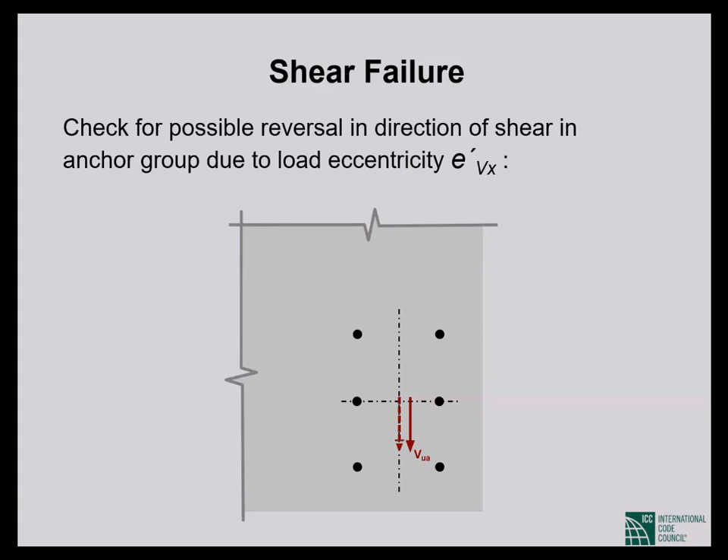So similar computation as the last time, we have a shear applied at an eccentricity of 25 millimeters that is equivalent to a concentric shear plus a torsion. The torsion will cause additional shear in the anchors to the right, and it will take away shear from the anchors to the left. Now this takeaway should not reverse the direction, so that's what we are checking. Maximum shear comes out to 5/24, minimum shear is 1/8. There is no shear reversal. So that is like checking for an anchor going into compression.

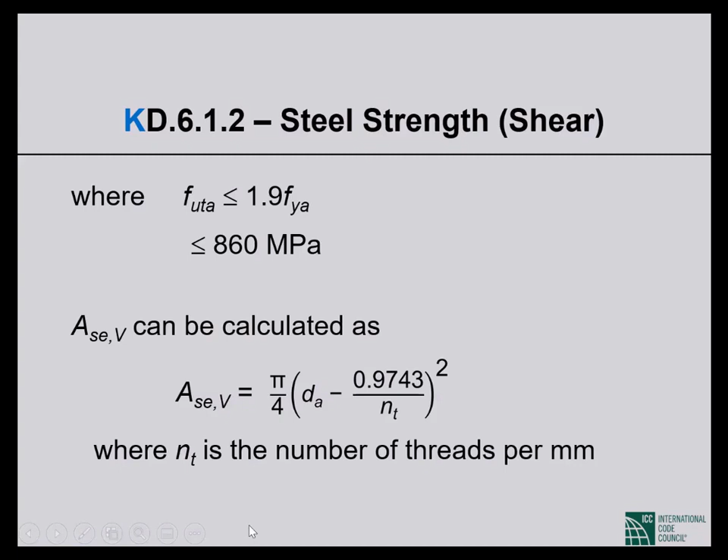The effective area in shear can be calculated from that expression. Your best bet is to get that area from the manufacturer. In the example problem, our effective area is the same as in tension, 79.35 square millimeters.

The ultimate tensile strength of the anchor, 400 MPa, is less than 1.9 times 250, which is 475, and also less than 860 MPa. So our steel governed shear strength is 60%. We have headed bolts, not studs. So 60% of the 400 MPa multiplying the 79.35 square millimeters for a single anchor is 19 kilonewtons.

19 kilonewtons, this is the nominal value. The phi factor for shear failure of steel anchor is 0.65, ductile steel element under shear. No additional 0.75 because this is a steel failure mode, not a concrete failure mode. So the design shear strength is 19 times 0.65, which is 12.35 kilonewtons. This is for a single anchor, single bolt.

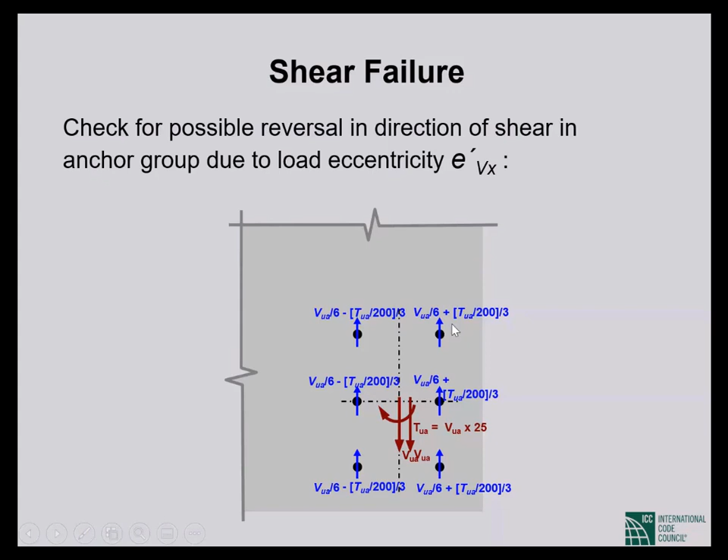Now, for shear in the y direction, where we have an eccentricity - for y direction shear, the anchor that experiences the most shear experiences 5/24ths of the shear applied to the group. So the maximum shear on a single anchor is 5/24ths of the shear applied to the group.

So we have a single anchor strength of 12.35 kilonewtons. We have to multiply that by 24/5 to find the maximum shear demand that the whole bolt formation can support for steel failure in shear. 24/5 times the calculated 12.35 comes to 59.28 kilonewtons.

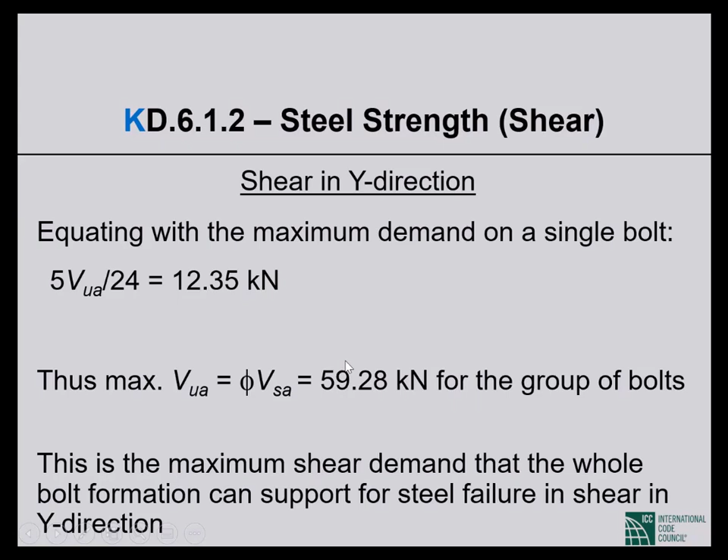Shear in the X direction, where we have no eccentricity, each anchor experiences 1/6 of the shear applied to the group. So the group strength is 6 times the calculated 12.35, which is 74.1 kilonewtons. This is the X direction shear strength. The other number is the Y direction shear strength: 74 versus 59.28. The reduction from 74 to 59.28 is because of the 1-inch eccentricity of the shear in the Y direction.

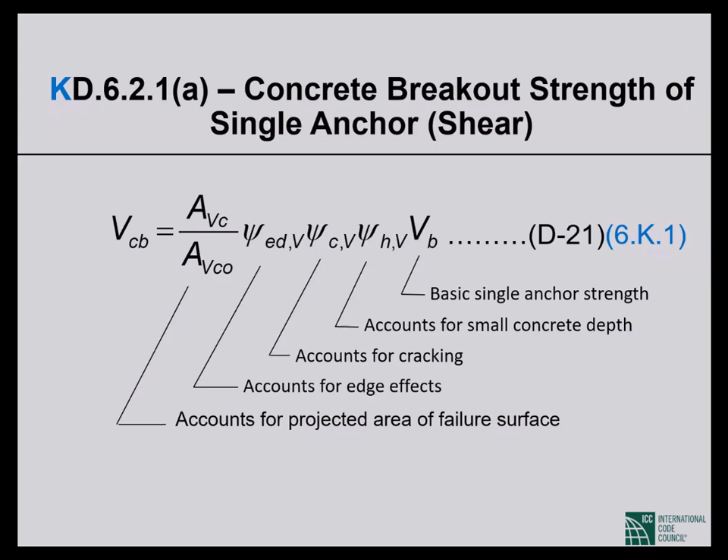We looked at the definition of an anchor group in tension. Now, what is the definition of an anchor group in shear? A number of anchors of approximately equal effective embedment depth, with each anchor spaced at less than 3 times C sub A1. Now, a couple of very important things: when we were talking about tension, C sub A1 was the shorter edge distance, C sub A2 was the larger edge distance. When we are talking about an anchor subject to shear, C sub A1 by definition is always the edge distance in the direction of shear. C sub A2 is perpendicular to the direction of shear. This is very, very important.

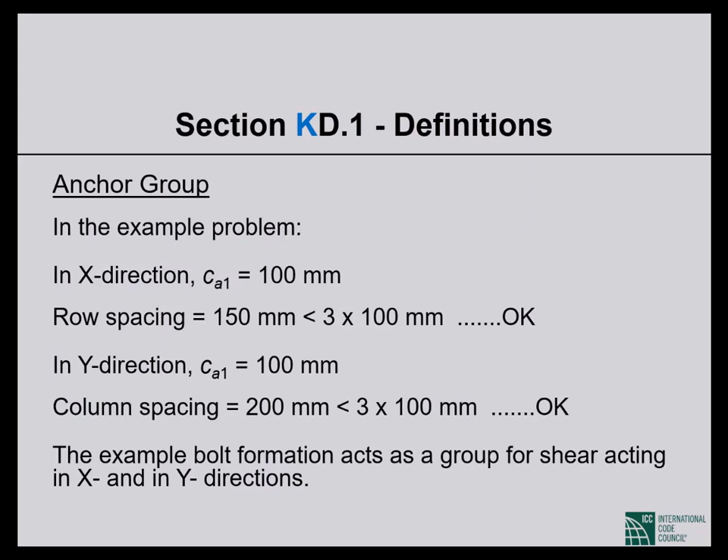In the x direction, we have a spacing less than 3 times C sub A1. In the y direction also, we have a spacing less than 3 times C sub A1. So we have a group of 6 rather than 6 individual anchors, or 2 groups of 3, or 3 groups of 2.

Now, everything in appendix D, or your appendix K, is shear perpendicular to the edge. How do we calculate shear strength parallel to the edge?

This is crude, but this is what we have in appendix D of 318. Even now, ACI 318-19 has the same thing, and in appendix K you have the same thing. For shear force parallel to the edge, V sub CB breakout strength would be 2 times the breakout strength that is perpendicular to the edge, and group breakout strength will also be 2 times the group breakout strength perpendicular to the edge.

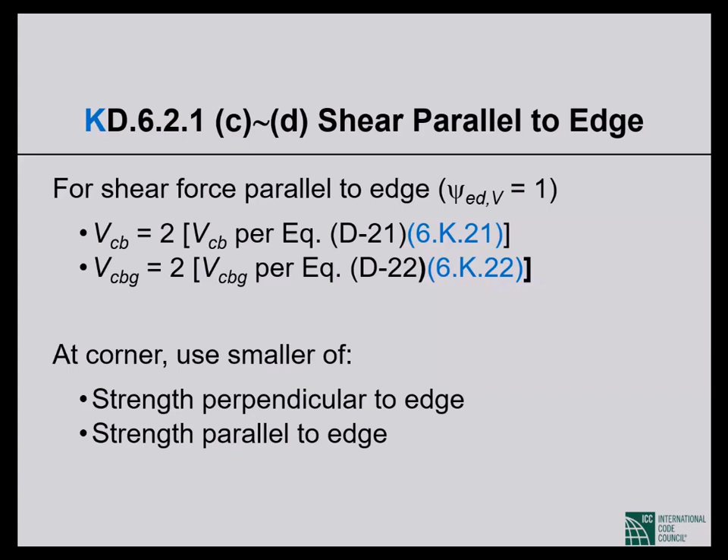At the corner, if you have an anchor at the corner, use the smaller value of strength perpendicular to the edge and strength parallel to the edge. I think if you think about it, you will see that it makes a lot of sense.

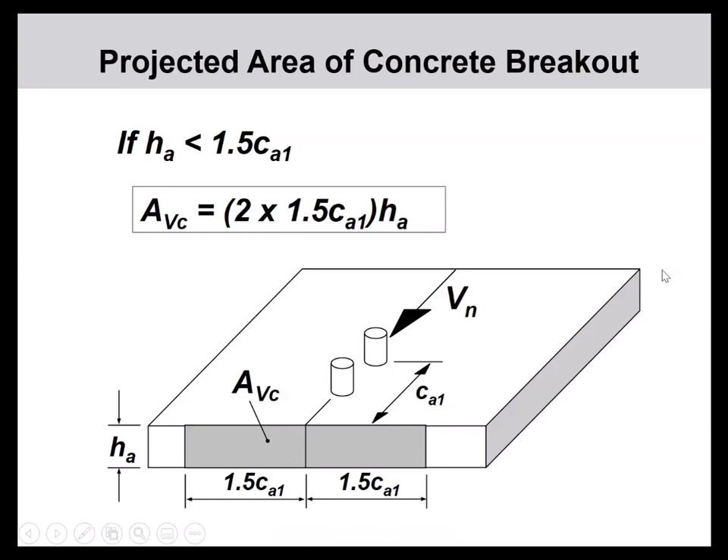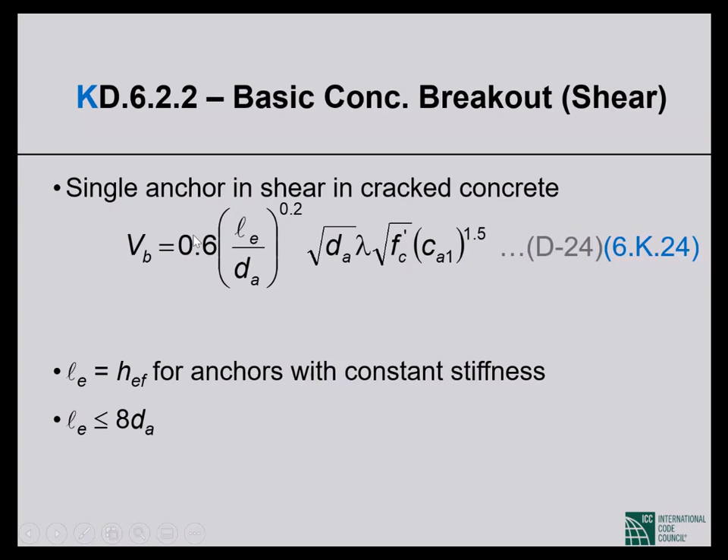Now this is the basic equation: 0.6, the L sub E over D sub A raised to the power 0.2, etc. If you are able to satisfy 5 given conditions, and I will not go through them in view of our time situation, then there is an alternative equation that you are allowed to use. In the basic equation, the constant was 0.6; in the alternative equation, the constant is 0.66. You get a 10% advantage, the rest of it is the same. So if you are able to satisfy the 5 conditions, then you are allowed to use the second equation.

Just as in tension, we consider the possibility that our anchor may be close to 3 or more edges, we have to consider the same possibility here, but here close to an edge would mean edge distance less than or equal to 1.5 times C sub A1, not embedment depth. C sub A1 is again the edge distance in the direction of shear. So where 3 or more edge distances are less than or equal to 1.5 times C sub A1, we will have to adjust it, instead of actual C sub A1, we use a reduced effective C sub A1.

Let me just go to the example, and I will show what it is supposed to be. So we have a group of 2 anchors. Edge distance this way 300 millimeters, this way 125. So the edge distance in the direction of shear, C sub A1, is 300 millimeters. The perpendicular edge distances are what we need to look at: 125, 180, and 200, the depth of the concrete, that is also an edge distance now. So we have an edge distance in the direction of shear of 300 millimeters, and 3 perpendicular edge distances of 125, 180, and 200 millimeters.

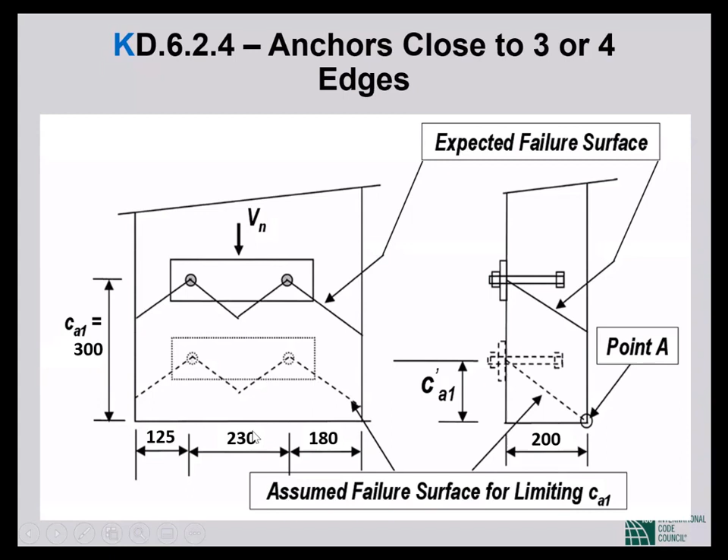The spacing between anchors is 230. So the effective C sub A1 will be the largest of the edge distances, 125, 180, or 200. The largest is 200. 200 divided by 1.5, or 230 divided by 3, whichever is the larger of the two. Again, the effective C sub A1 that we have to use is the largest of the edge distances of 125, 180, or 200, which is 200, divided by 1.5. That's one number. Or the 230 divided by 3, that is the second number, larger of the two numbers, is the effective C sub A1.

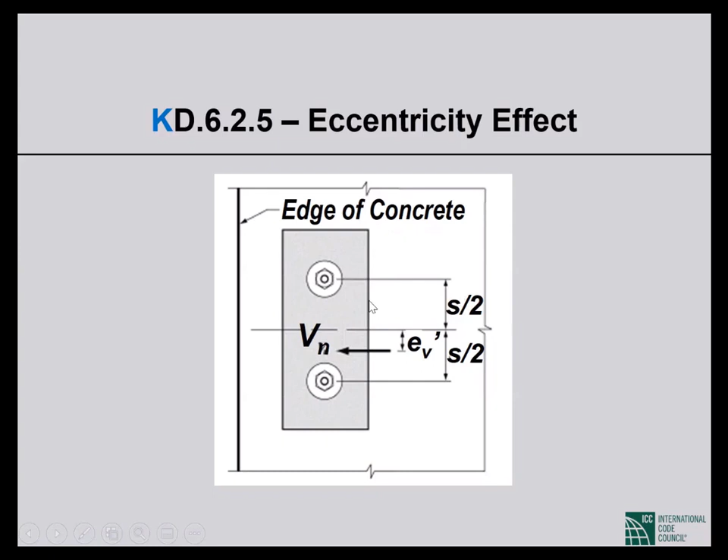Correction factor for eccentricity of shear is given by this expression. The eccentricity is illustrated in this picture. This is the resultant shear, and this is the centroidal axis of the group.

The correction factor for edge distance: if the perpendicular edge distance is larger than or equal to 1.5 times the edge distance in the direction of shear, no correction. If the perpendicular edge distance is less than 1.5 times the edge distance in the direction of shear, then the edge distance correction is 0.7 plus 0.3 divided by this expression.

Correction factor for uncracked concrete. This is now much more complicated. If it is uncracked, it is 1.4. If it is cracked, it is not automatically 1.0 as in the case of tension.

The psi c,V is 1.0 if there is no supplementary reinforcement, or if the supplementary reinforcement consists of bars smaller than number 13 in size. If you have supplementary reinforcement consisting of bars larger than or equal to number 13 in size, the correction factor is 1.2. And if the supplementary reinforcement consists of bars larger than number 13 in size, and is enclosed within stirrups with spacing not exceeding 100 millimeters, then you are as good as uncracked concrete, and you get a 1.4 correction factor.

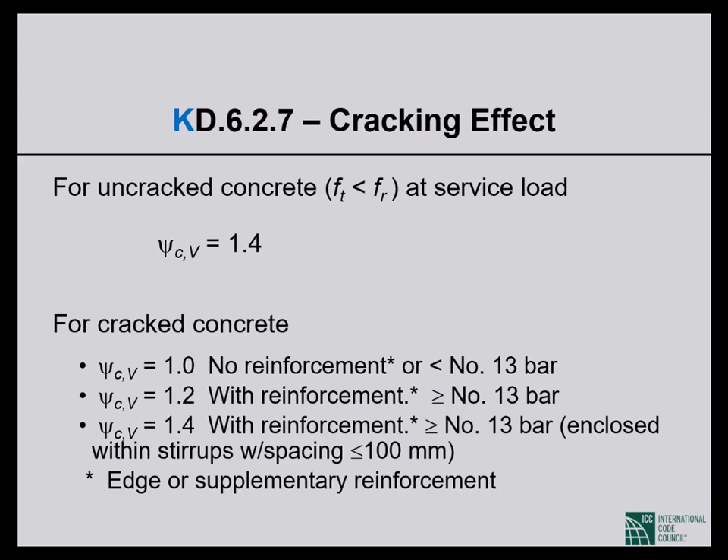The correction factor for insufficient depth: if the concrete depth is less than 1.5 times C sub A1, then this is your correction factor, given by this expression.

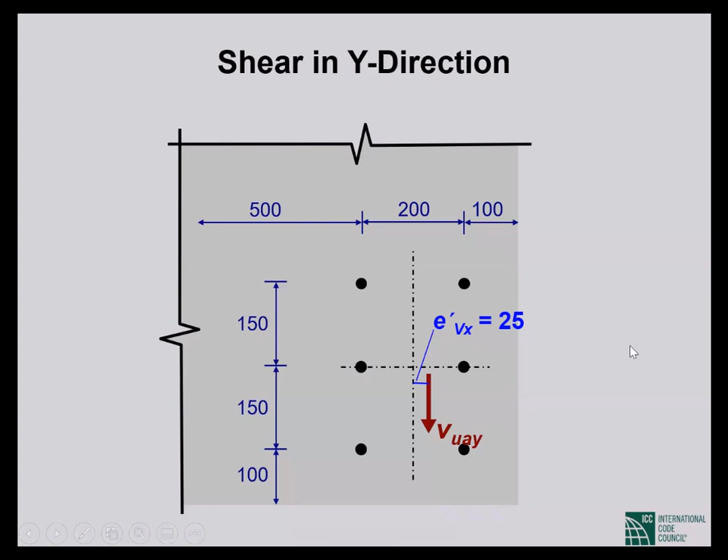Coming back to our example, this is the Y direction shear, where we have an eccentricity of 25 millimeters. From here on it gets, in a way, complicated, but also repetitive. Please follow me closely on this first one, and then I will do a lot of skipping, since it is all repetition.

So the possibilities are: those two anchors break out under one-third of the shear applied to the group. If that does not happen, those two anchors may break out under two-thirds of the shear applied to the group, transferring their shear to those two. And if that does not happen, then the back anchors break out under the entire shear applied to the group.

So we are now considering the front anchors breaking out under one-third of the shear applied to the group. C sub A1 is 100 millimeters. Depth of concrete is 460 millimeters, which is larger than 1.5 times C sub A1.

C sub A2 to the right is 100 millimeters, same as C sub A1. C sub A2 to the left we are taking as 500 millimeters — we have a lot of concrete to the left, but for calculation purposes we take the edge distance as 500 millimeters. So we have only one edge distance less than 1.5 times C sub A1, meaning we do not have an anchor close to 3 edges, so C sub A1 of 100 millimeters does not have to be adjusted down.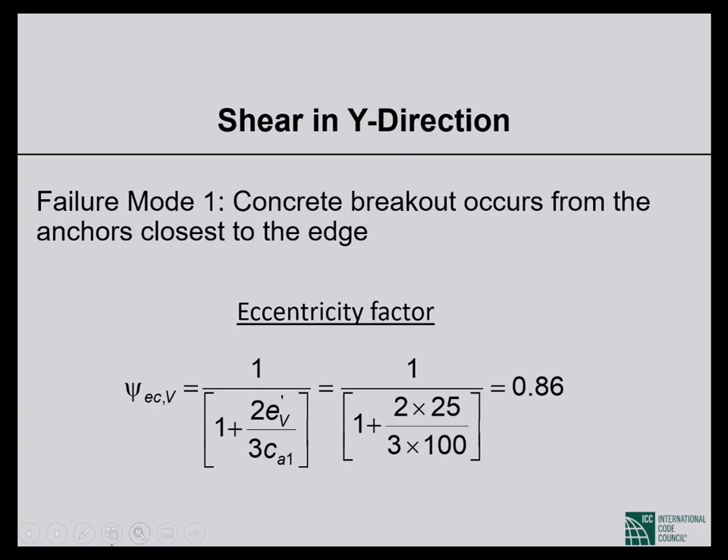So this is basic concrete breakout strength, V sub B. Eccentricity factor: in our case, y direction shear, we have an eccentricity of 25 millimeters, which gives us a correction factor of 0.86 for an edge distance of 100 millimeters. The edge distance correction, C sub A2 to the right is 100 millimeters, which is less than 1.5 times C sub A1. So edge distance correction is 0.7 plus 0.3 times C sub A2 of 100 over 1.5 times C sub A1 of 100, which gives us 0.9. That is edge distance correction.

The cracking factor, assuming we have supplementary reinforcement, comes to 1.2. Concrete depth factor: we have plenty of depth, 460 is way larger than 1.5 C sub A1, so we don't have any correction for insufficient depth.

So for shear in the y direction, the group breakout strength is the A sub B of 67,500 square millimeter calculated value divided by A sub B0 of 45,000 square millimeter calculated value, times eccentricity correction 0.86, edge distance correction 0.9, cracking factor 1.2, correction for insufficient depth 1.0, and basic breakout strength of 20, which gives 27.86 kilonewtons. So for the group of 2 to the front, breaking out in shear, the strength is 27.86 kilonewtons. This is nominal strength.

So now the C sub A1 distance increases to 250 millimeters. That's what changes, from 100 to 250. All the calculations that I showed you are repeated for the second case, and the bottom line: the concrete breakout strength of the group of two in the middle, reduced by 0.75 and phi, comes to 34.93 kilonewtons.

Remember, those middle two break out under 2/3 of the shear applied to the group. So the total shear demand that the whole group can support before mode 2 failure takes place, the middle two breaking out, is 1.5 times 34.93, which is 52.4 kilonewtons.

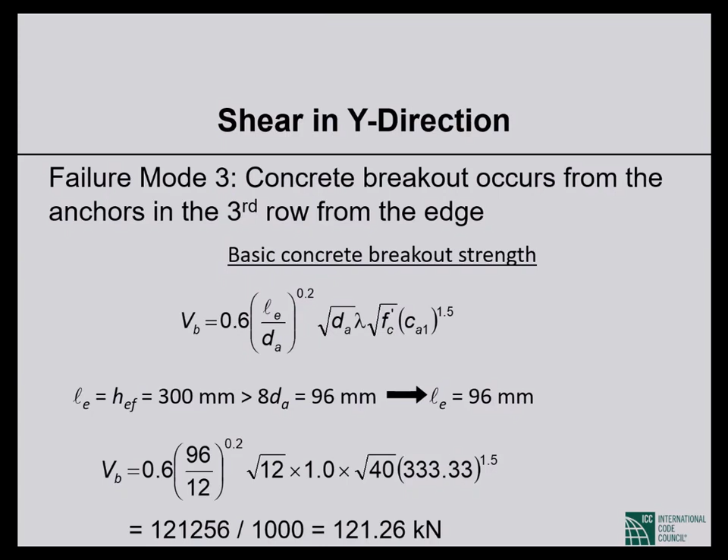Then we consider the third possibility, the back anchors failing under the total shear applied to the group. And that takes us, very interestingly, to the C sub A1 increasing to 400 millimeters. This group of two now becomes close to 3 edges because C sub A1 is so large, so the C sub A1 of 400 has to be adjusted down. It came to 333.33 millimeters. This very large edge distance of 400 millimeters meant the anchor group, that group of two, is close to 3 edges, and because of that, the 400 millimeters of edge distance had to be adjusted down to 333 and a third millimeters.

So going through the same calculations I've shown you twice now, the strength comes out to 45 kilonewtons. That is the total. The back anchors were failing under the total shear applied to the group, so 45 kilonewtons is the number that the whole group can sustain.

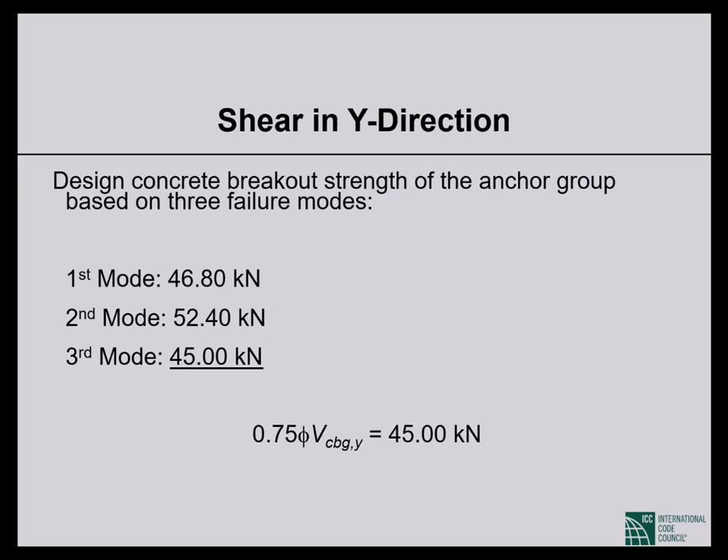So for the first two anchors, the front anchors breaking out, the group strength was 46.8 kilonewtons. For the middle two breaking out, 52.4 kilonewtons. For the back anchors breaking out, 45 kilonewtons. So the group breakout strength for Y direction shear is 45 kilonewtons.

X direction shear, we have two possible failure modes: the three anchors to the right breaking out, or the three anchors to the left breaking out. Skipping all the calculations, going to the bottom line, this is concentric shear, no eccentricity correction.

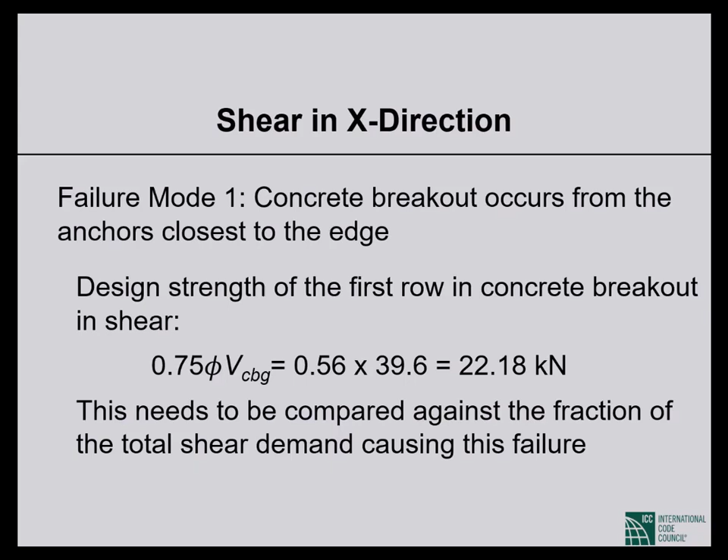So for the front three breaking out, it is 22.18 for the group of three. And because they are failing under half of the shear applied to the group, strength is 44.36 kilonewtons.

For the back, the left three breaking out under the total shear applied to the group, the strength comes to 90.35 nominal value, reduced by 0.56, it comes to 50.6 kilonewtons.

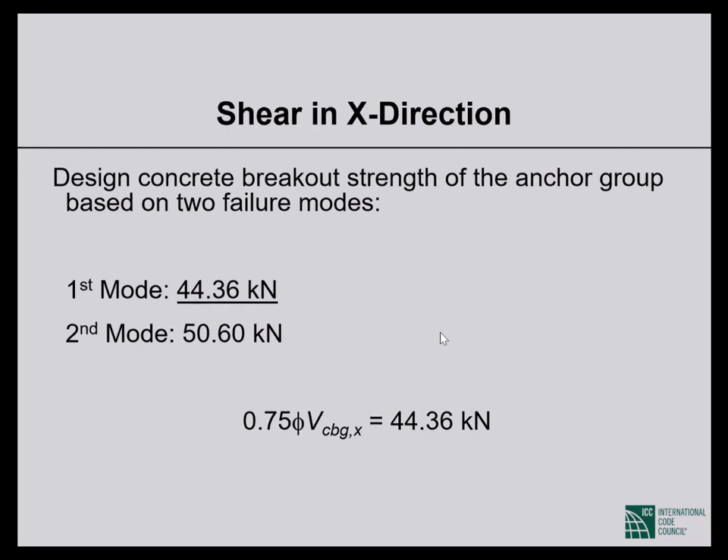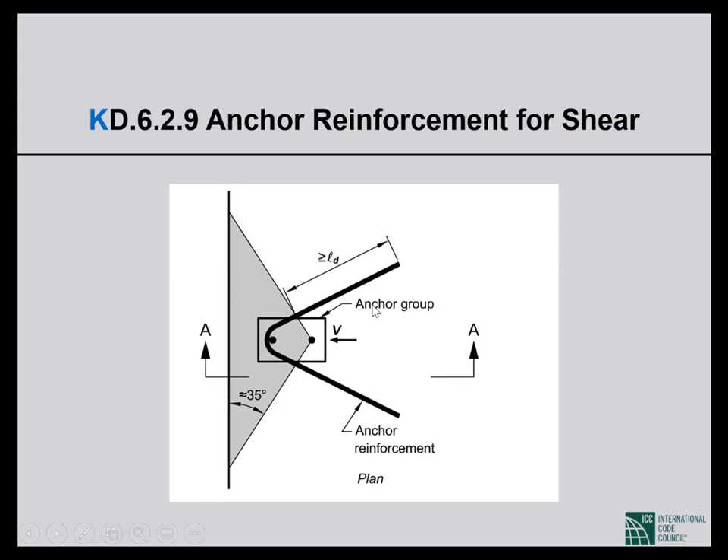And under this shear, this is what breaks out. So this is trying to break out, and this anchor reinforcement is trying to suppress that breakout - this is the important picture. So it could be a hairpin or a spread hairpin, and the key thing is that this has to be fully developed.

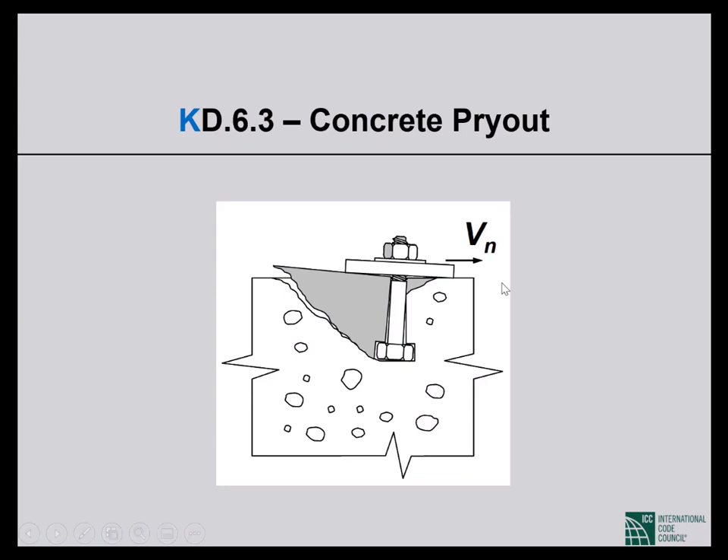Pry out failure - I think this picture is very graphic. This is a shallow anchor; under shear, it kicks out and destroys the thin cover concrete to the top. The language describes the picture, so it is unnecessary to go into it further.

So the pry out failure - single anchor shear strength corresponding to pry out failure is the breakout strength in tension, times a constant. I want you to pay attention to this: this constant is 1.0 for very shallow anchors, embedment depth less than 65 millimeters, and is equal to 2 when embedment depth is larger than 65 millimeters.

So let me make a very important point so far. If you look at the other two failure modes in shear - the steel failing or concrete breakout - the embedment depth does not play any role. So is shear strength independent of embedment depth? Is shear strength totally dependent only on C sub A1?

This failure mode tells you no, absolutely not, because N sub CB is a tensile strength - it is a function of embedment depth. Also K sub CP, you see how important embedment depth is: if embedment is shallow, all you get is 1. To get a value of 2, you have to have embedment more than 65 millimeters. So for very shallow embedment, you get penalized twice - this constant goes down to 1, and this number will be small.

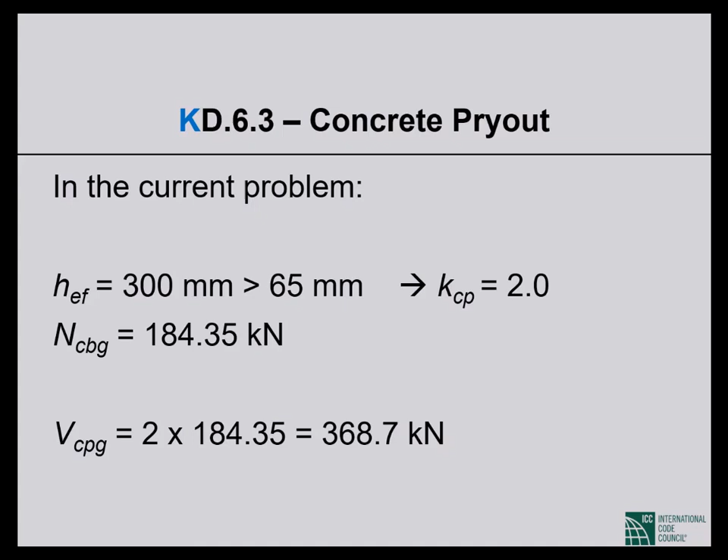In our case, we have embedment depth far exceeding 65 millimeters, so we have a K of 2. The breakout strength in tension, calculated earlier, was 184.35. So the pry-out strength is 368.7 kilonewtons, reduced by 0.75 and the phi factor of 0.7. Now it is Condition B by definition for pry-out, so phi is 0.7. We get 53% of the nominal value, or 195.41 kilonewtons. So this is the bottom line.

Steel failure strength is 74.1 kilonewtons for X direction shear, 59.28 for Y direction shear. Concrete breakout strength is 44.36 for X, 45 for Y. Pry-out strength, irrespective of direction, is 195.41.

So the group strength for shear in the X direction is the smaller of the two values, 44.36, and the group strength for Y direction shear is the smaller of 59.28 and 45, which is 45. So the minimum strength for both X shear and Y shear is concrete-governed strength. This group is not suitable for Design Category C application.

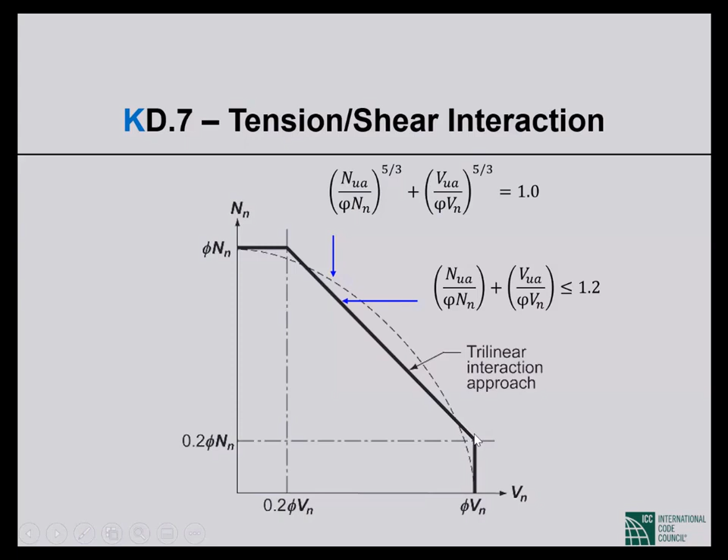For the shear-tension application, since we are out of time, I'll just tell you that we used to use this kind of interaction equation. ACI 318 has replaced that with this three-linear-segment interaction. As long as the applied tension is no more than 20% of the design tensile strength, that tension has no impact on shear strength. Shear strength doesn't decrease. But if the applied tension is larger than 20% of the design tensile strength, shear strength decreases linearly, as given by the middle portion of the picture.

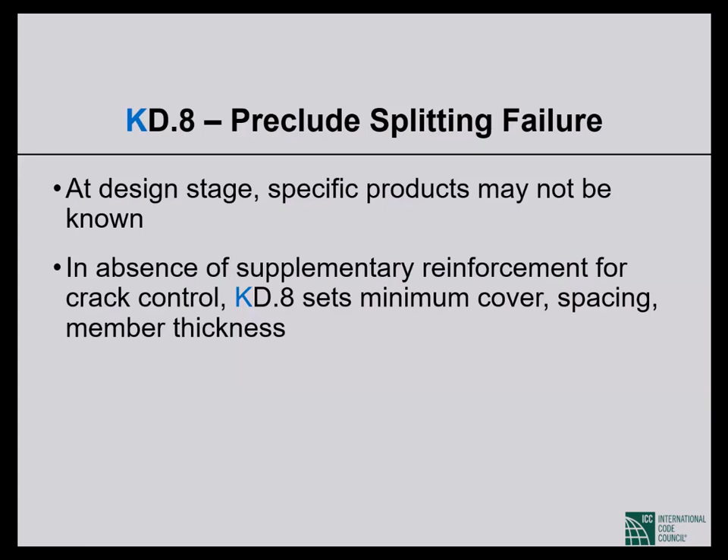At design stage, specific products may not be known. In absence of supplementary reinforcement for crack control, this section KD.8 sets minimum cover, minimum spacing, and minimum member thickness requirements. In other words, ACI 318 Appendix D puts limitations on cover, spacing, and thickness in order to preclude splitting failure. Splitting failure is simply not allowed to take place.

Final thing: at least until ACI 318-08, which is BNBC 2020, we had these limitations. Now it's a somewhat different story, but I don't want to confuse you with later editions of ACI 318, because then we never end. For anchors with diameters not exceeding 50 millimeters and tensile embedment not exceeding 635 millimeters, the concrete breakout strength requirements apply. The concrete breakout strength expressions I showed you, for tension and shear, are good only as long as your anchor diameter does not exceed 50 millimeters and tensile embedment depth does not exceed 635 millimeters. Keep that in mind.

Those are limitations coming out of Stuttgart tests. In Stuttgart, they did extensive anchor tests, but they did not go beyond 50 millimeter diameter anchors, and they did not go beyond 635 millimeter embedment depth. So it was felt safe to put those limitations on. I wanted to mention that to you.